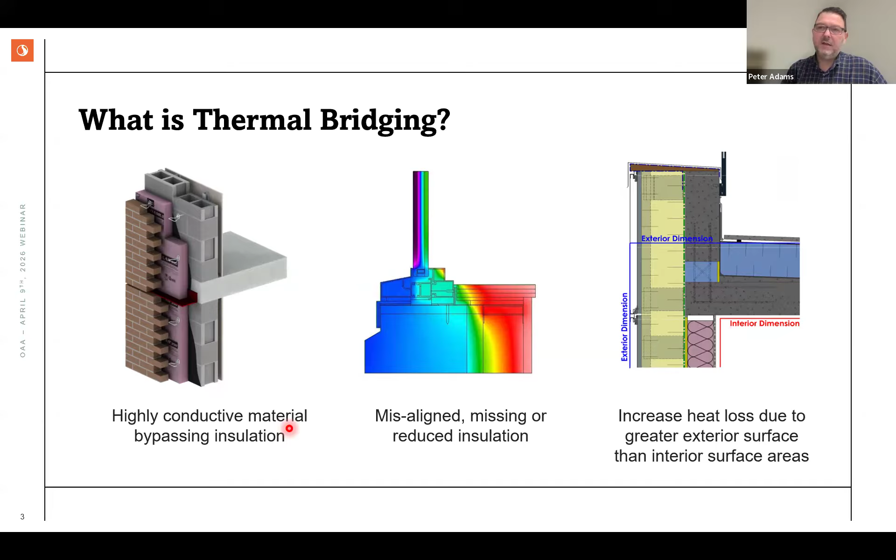And the one on the right is almost always ignored. It's the increased heat loss due to an exterior surface area being greater than an interior surface area. If you think about it, it makes sense—heat flow is an area function, an area phenomenon. So if you've got a larger surface area outside, you're going to conduct more heat through the wall. That's what a thermal bridge is.

Just a reminder, heat is lazy. Just like your lazy teenager—if you put the fridge in a straight line to them, or the treat cupboard, they're going to get there pretty quick and eat you out of house and home. If you put the fridge in the basement and make it harder to get to, maybe they'll take their time getting there for the next bag of chips. So heat will follow the path of least resistance.

When we're talking about U factors or effective R values for walls, it includes thermal bridges, just for our discussion today. So these bridges, as you can see, we've got studs and other elements—they degrade the thermal performance of the overall system. They can lead to condensation, thermal discomfort, and certainly increase energy loss, which has been a focus for the last number of years.

So where do we find these? Well, common ones are that slab edge detail I showed you, where you've got a shelf angle protruding through, or around windows. But basically it's any type of repetitive structural member—a stud, a joist, a lintel—that repeats itself across the building envelope. Or it could be a one-off situation too, such as a structural penetration, a column or a balcony. The common one would be a support for a canopy that comes out through an insulated wall assembly to support a roof over an entranceway or something like that.

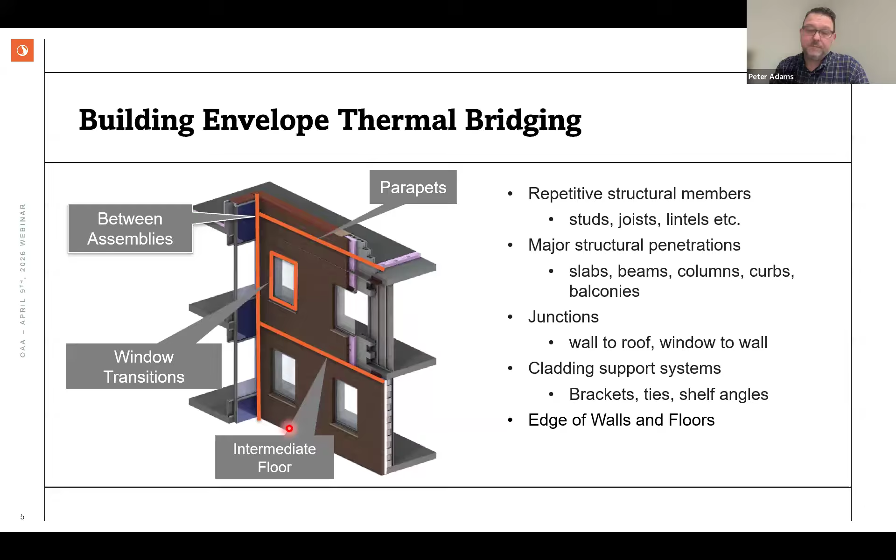So I stole this slide, this concept, from my friend John Straube. Some of you might know him, some of you are probably trained by him.

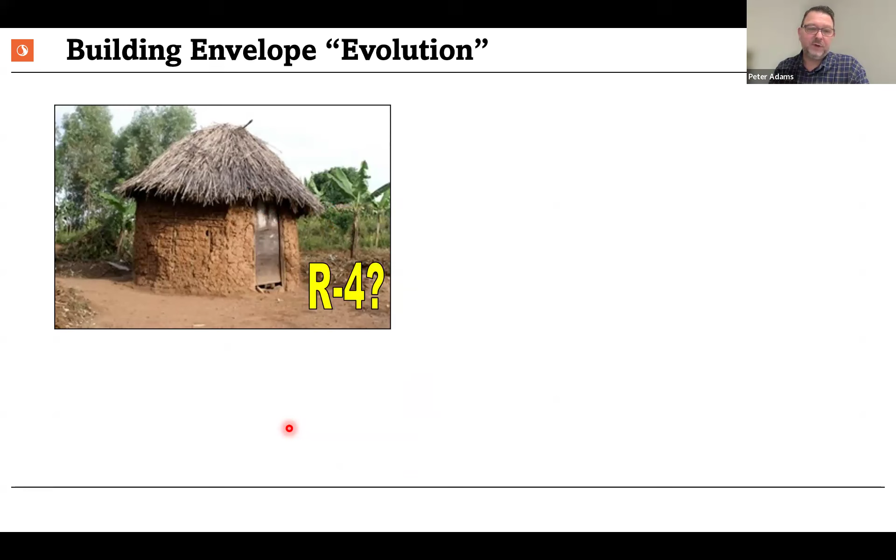The evolution of the building envelope's thermal performance—years and years ago we moved out of caves and started building for ourselves, starting off with something like this maybe, and with a mud wall maybe getting something like R4. We move forward—this is the Tower of London, built around the year 1000, and here with just the thickness of the walls we have, maybe it's about an R5.

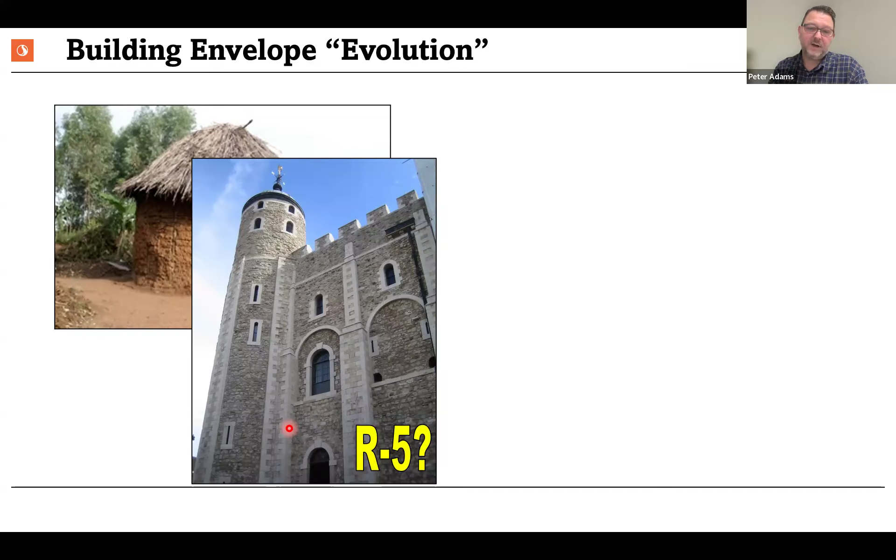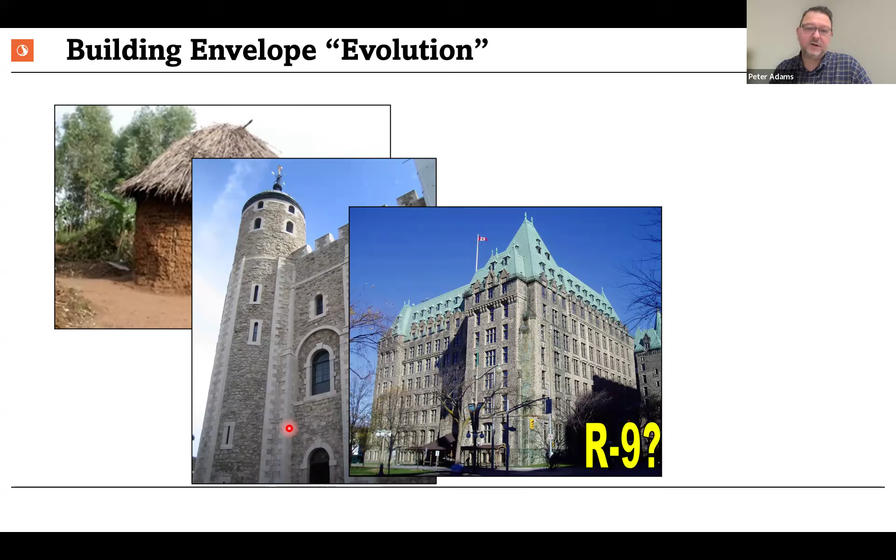This is the Justice Building at Parliament Hill. I had the pleasure of working on this building when I was at the National Research Council. It's a thick stone wall, but it's got terracotta brick on the inside, plaster—just with all the different layers and some air spaces, maybe you achieve an R9 for this building.

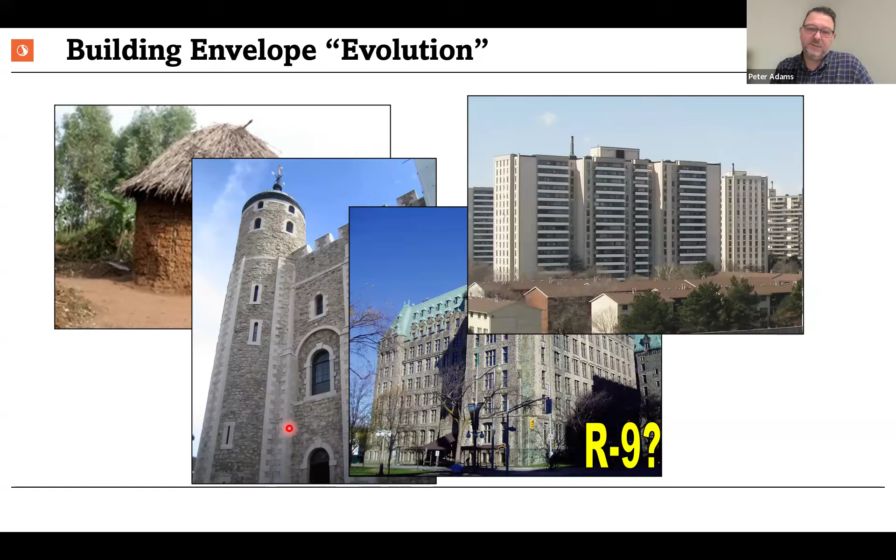This condo or apartment building—there are hundreds of these in the Toronto area, going up in the 60s and 70s. It started to introduce some insulation into these walls, and maybe we get to R11. What about a semi-modern window wall system or curtain wall system? What do we think the R value for that would be? So should we get poll number 1, please?

Okay, so if you thought it was R20, I can certainly understand your optimism.

Okay, looks like the majority of you are picking R4, which sadly is about right. I did have an argument. I remember discussing this building when it was being constructed, and having an argument with one of the designers at the time who was adamant that the walls were R20. At the middle of the spandrel panel over the slab edge, it might have been R20, but for the most part, that building was operating as an R4.

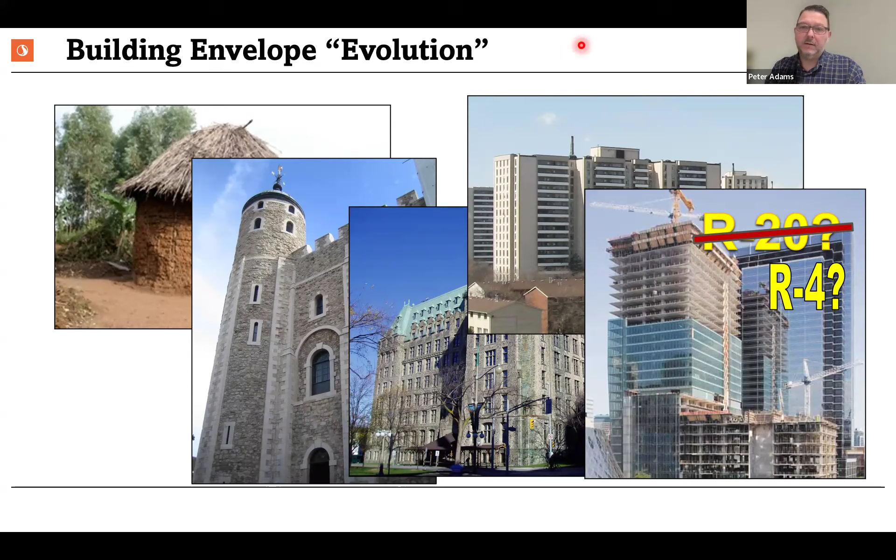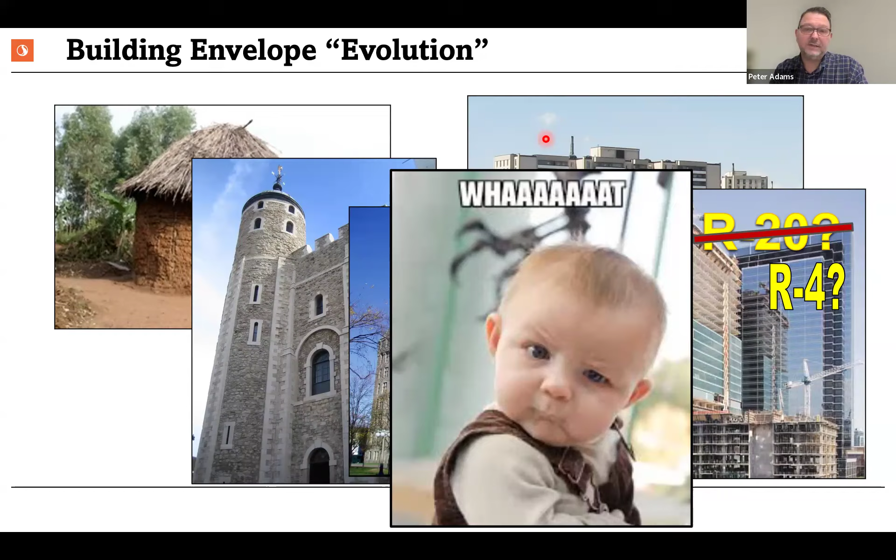A little bit surprising. Now this little guy looks like he might be doing something else at this time, but he's surprised. And either way, it's a pretty crappy situation for our wall systems when we've got modern buildings going up like this. But there is hope.

So we've got poll number 2, please. There'll be a test later. No, just kidding.

We're about split. So I see the poll results coming a little bit delayed. That's okay, we're about split on this. 24% said there's no way to tell. 44% said the areas without condensation are spandrels, and 33% said the areas without condensation are vision areas.

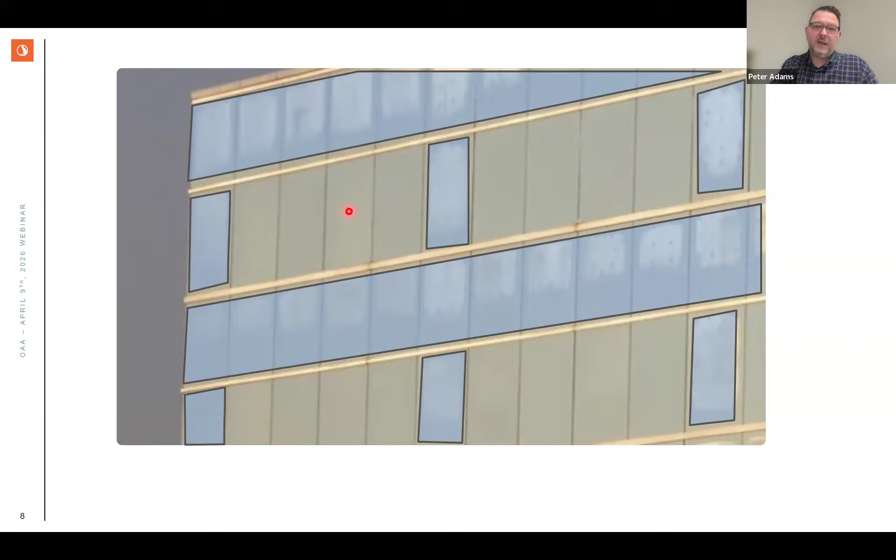What struck me most about this picture is that, apologies, that there's a lot of areas where there's still no condensation in the spandrel sections. And so that means there's heat transfer there. There's maybe not as much heat transfer as the glazing, but there is certainly more heat transfer here than you would expect from an insulated spandrel assembly.

You can even see the heat transfer as a result of the stick pins that are holding insulation into the back pan. There's little areas here. There's just enough heat coming through those pins to warm up the exterior glass in those areas to prevent condensation.

But what struck me is that, and what I mean by poor man's infrared here, is that if you're a building mechanical engineer and you're designing your system based on the thermal performance of this wall, and you're assuming this whole panel here is going to give you the thermal protection that's expected on paper, well, you're going to grossly underestimate the amount of heat loss that you're going to get for this building.

And that's why for many, many years—it's getting better now, but for many years—a lot of the predictive equations for thermal performance for a building were always more favorable; the results were always better than what the reality ended up showing as the building started to operate for a number of years.

So this was a big deal. If you're designing this, you're going to assume that all this is at, say, R15 or whatever, but really it's not. And if you take this over the whole area of the building, that adds up to quite a bit. And we're going to get into more of that as we move forward.

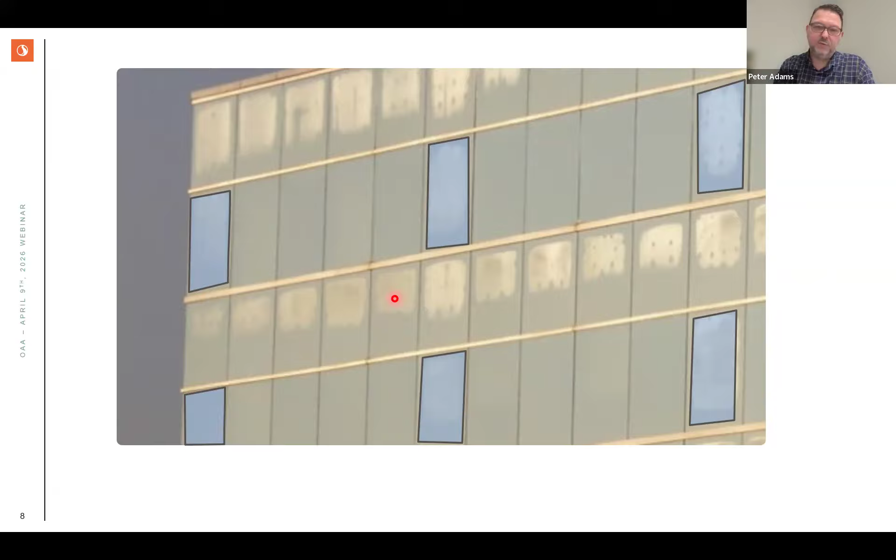So this is what's happening here. You've got quite a bit of heat coming through the glass. You've got a lot more heat coming through the framing, the metal parts, and then less heat coming through the insulation.

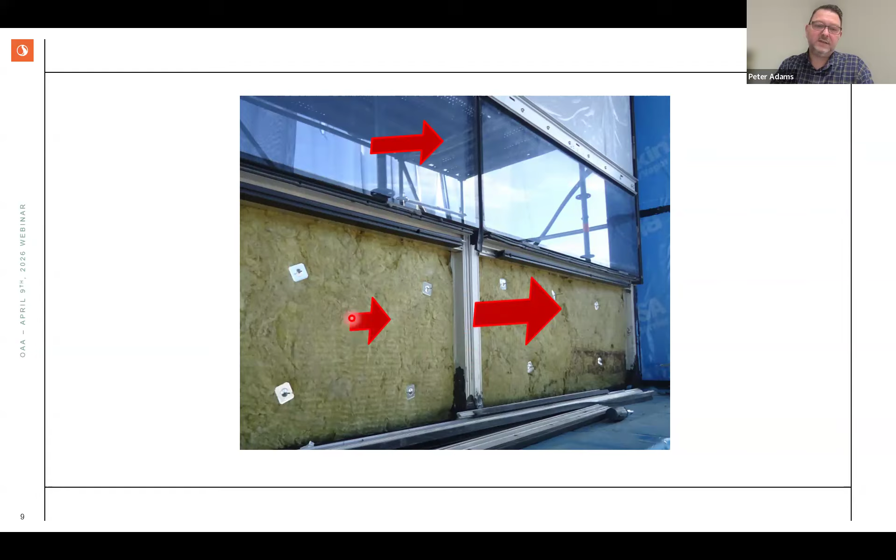So it's not just academic. We've got a lot of buildings that look like this in the Toronto area and in Ontario, and across Canada for that matter. And for a while it was kind of, well, yeah, you're going to lose more heat, and then your energy bill is going to be higher. But we're starting to see some real world implications of these decisions to use some of these systems that don't provide the best thermal performance.

This was a brand new condominium corporation we were doing a performance audit of. And one of the things we noticed when we went into the suite over here, you can see this is a brand new building, and there's already condensation occurring on the inside of the glass.

There's a little bit of snow and ice that accumulated outside, and now you've got condensation on the inside. But more telling to me is that this chair is now pushed away from the exterior wall.

In the old days, you had an opaque wall here, maybe with a punch window. You could put your furniture right up against the wall, sit and watch your Netflix or whatever. Now, if you're too close to the wall, you're too cold. You've got this cold surface that's sucking the heat from the back of your head as you sit and watch television or read or whatever you're doing.

So everybody's moving their furniture away from these walls, and your 800 square foot condo is now a 700 or 600 square foot condo, because this part of the wall, the floor here, is not really usable for furniture or for living. So it's not just academic anymore. There's real world implications of some of these decisions.

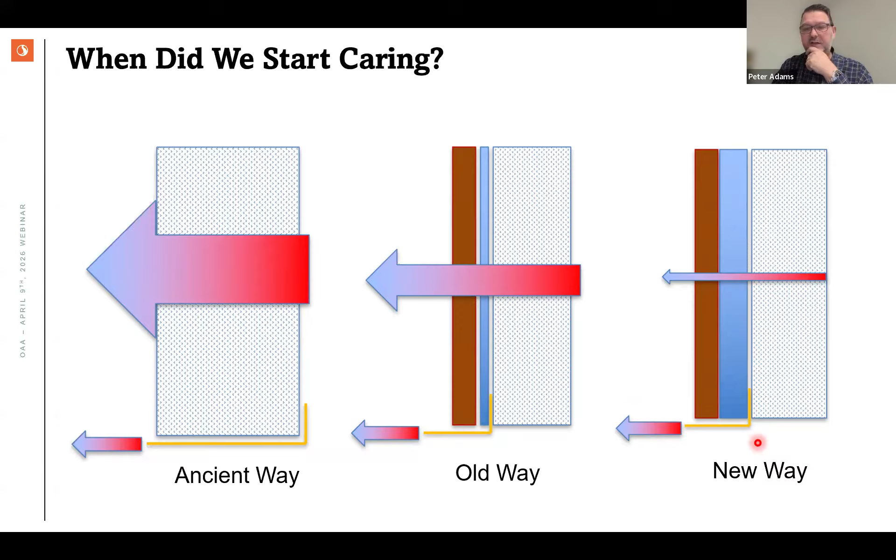You can see here that even though the thermal bridging hasn't changed, the amount of energy coming through our clear wall areas is greatly reduced. And so now this all of a sudden becomes a very large percentage of the whole energy loss for the building. We can no longer ignore these thermal bridges - they have to be included in our energy calculations and designs. Otherwise, we're just kidding ourselves.

So back about 15 years ago, maybe 16 years ago now, ASHRAE was starting to care about this stuff too, and the research project 1365 was put out. Morrison Hershfield at the time was a successful contractor for that work.

So these are slides captured from a presentation given around that time. At that time, the intent was to pick 40 common North American details and then do three-dimensional heat transfer analysis on those to try to figure out the effect of the thermal bridging. These assemblies included things like exterior insulated steel studs, concrete mass walls, curtain walls, precast panels, brick veneer walls - all assemblies that are quite common.

We didn't want to pick anything unusual, figuring that might come later should this catch wind and move forward. But that was kind of the focus back about 15, 16 years ago when this project first started.

One of the things we had to think about, and try to come up with a way to report this information once we started getting all this three-dimensional work done, is how to settle on a certain nomenclature. How do we report this? So we ended up with three different types of heat transfer.

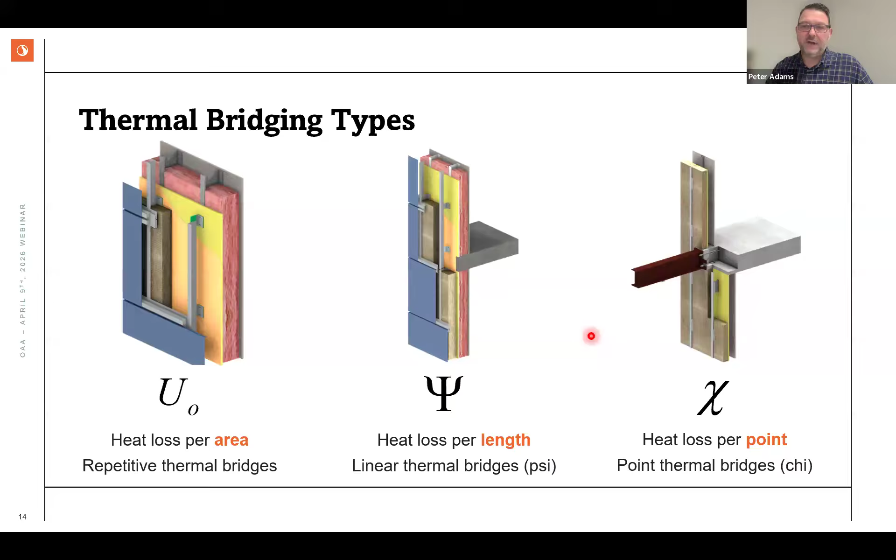And then we have our psi values, or our heat loss per length, our linear heat transfer, our linear thermal bridges. And then we have our point load heat transfer, or our point thermal bridges, our chi values. So the idea is that you add all these different types of heat losses together, and you can get a really good, accurate picture of the energy loss in your building and what's really going on.

The concept took a while to develop, and we actually picked up this concept from Europe—this whole idea of linear heat transfer and point load heat transfer.

The basic principle is pretty straightforward. You model the whole 3D assembly, such as this here, which would be your clear wall area plus, in this case, the through slab area, and you get a total heat loss. Then you model the wall without the thermal bridging element—just the clear wall area. If you take the difference between the two, you get the additional heat loss from the thermal bridge.

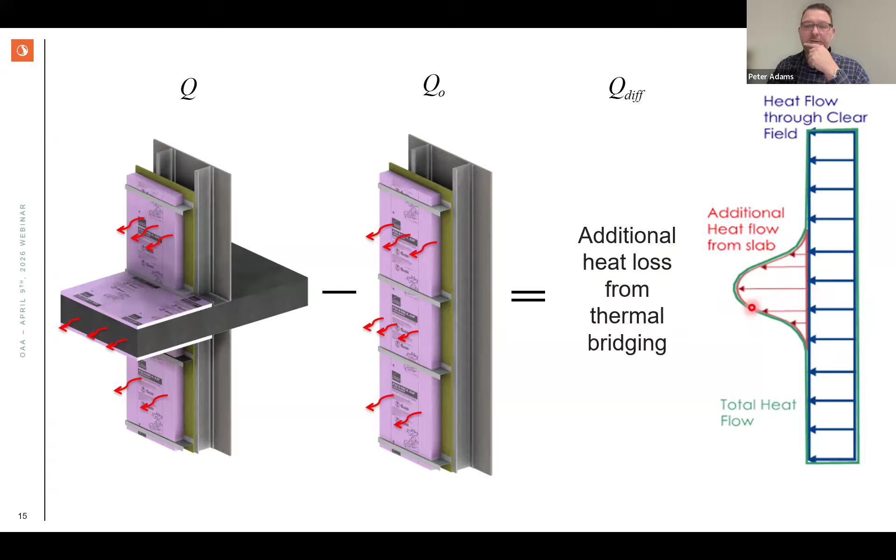So from a mathematical standpoint, your Q naught is basically your heat loss through the total wall of the building. You're assuming all the thermal bridging that occurs is included in that baseline wall assembly. Then you take the sum of all your linear heat transfer elements times their total length—if you've got 300 feet of something, you add that up. Then you take your total number of point load elements and add those up. This whole equation then becomes your total heat loss for the building.

So it's the clear wall U-value times the total wall area of your building, plus all your linear heat transfer elements added together, plus all your point load heat transfer elements added together. It ended up being fairly simple math, once the hard part—all the 3D work—had been done.

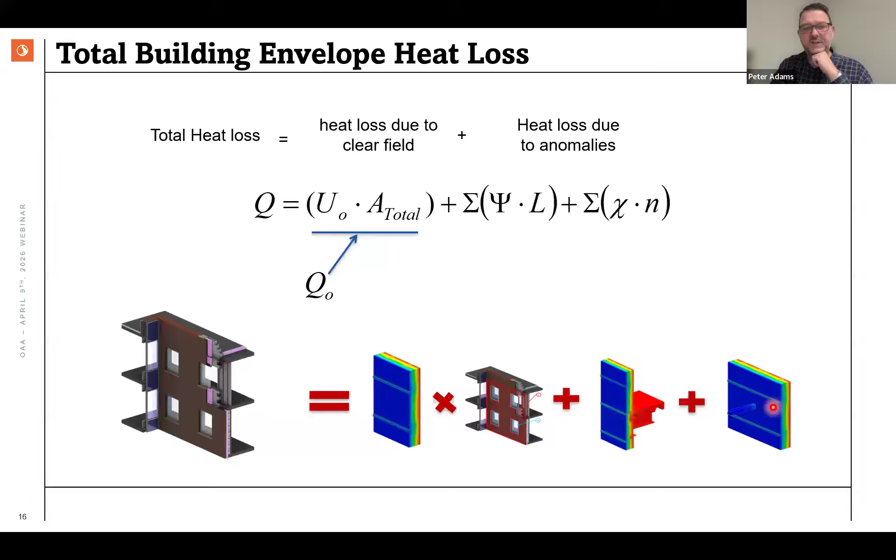The intent of this 1365 research project was to take the modeling away from the hands of the users—get the modeling done first, and then make it a lot easier for people to use the information that came out of it. Now, it was tricky.

With 40 details, it was unlikely you'd find a detail that matched what you had in mind for your building. You might get close and have to extrapolate between two different assemblies, but it was unlikely you'd find exactly what you wanted. Now we've got over 800 details produced, and the chances are pretty good you'll find something close to what you've got in mind for your building. So it's much more user-friendly and applicable now that you've got all these details at your fingertips.

The information that came out of that research study was put together into a thermal bridging guide. Some of you might be familiar with it—we'll get more into detail in a minute. Basically, the guide had an appendix with Appendix A and B. Appendix A showed what the wall looked like, with all the assumptions about the materials and how the wall was put together. Appendix B was the thermal performance information that came out of it. We'll step through that in more detail in a little bit.

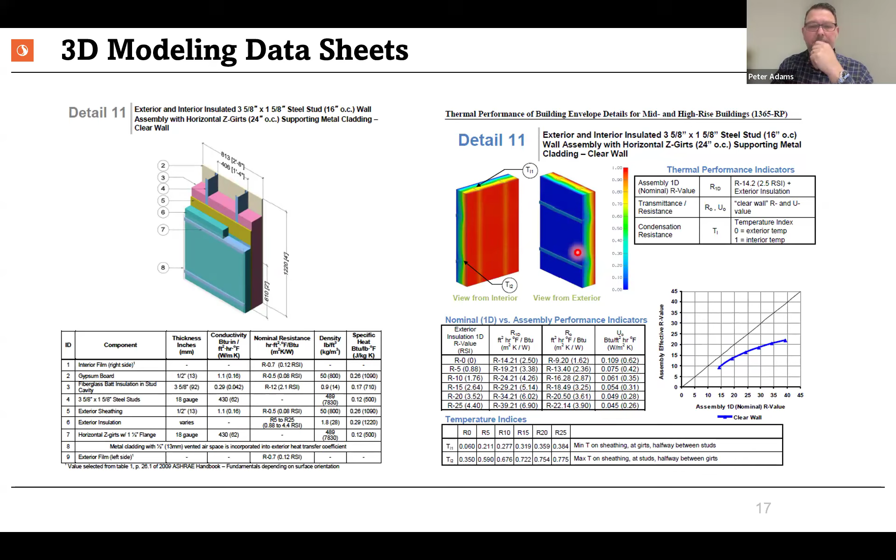So we started publishing information from this, and we weren't very popular for a while—sometimes reality is a difficult thing to swallow. A lot of the window wall and curtain wall manufacturers weren't that pleased that all of a sudden we're showing their systems performing a lot less than what everybody originally thought. People probably knew they weren't as good as some of the numbers being put forward in the literature, but I think the level of loss of performance was more significant than anybody would even imagine.

This is a very telling graph here. The blue line is a detail with air in a stud cavity—just an exterior wall. The red line is the same wall with foam in the stud cavity. On the left-hand side is your R value for the spandrel section, and on the bottom axis is the backpan insulation, the book value of insulation you're putting in the spandrel. You can see if you put R5 in the backpan, for the wall with spray foam you get an R value of 8.2, while without the spray foam you get an R value of 4.2.

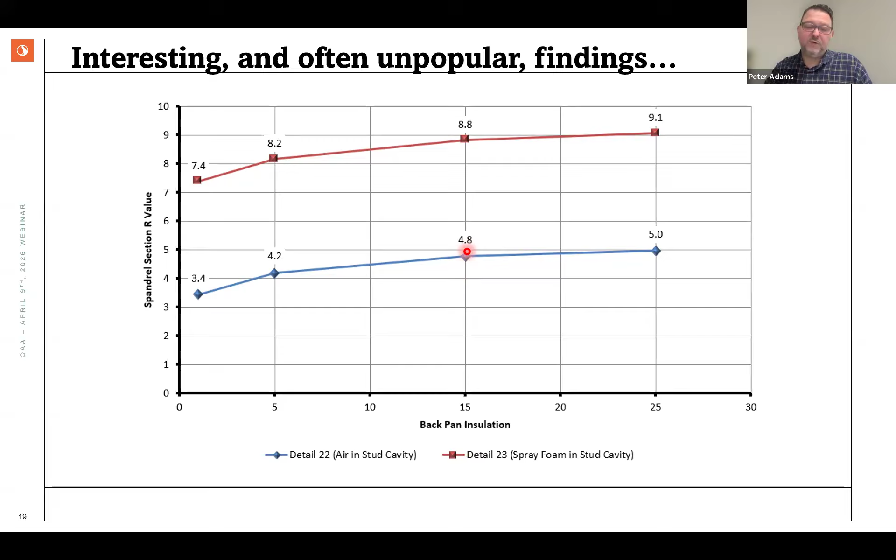And so you lose a lot of your thermal performance from that connection. You can see, the building on the top left was a building that I saw from the Chicago boat tour, the architectural tour from the Chicago River, which I highly recommend. It was fantastic. But you can see these types of details everywhere in our construction.

This one here is the Absolute Towers in Mississauga when they were under construction. It's a little bit of a cheap shot - I mean, this is an air-cooled engine. And the thought, of course, here is: should we actually design our buildings to look like things that are designed to exchange heat with the outside air?

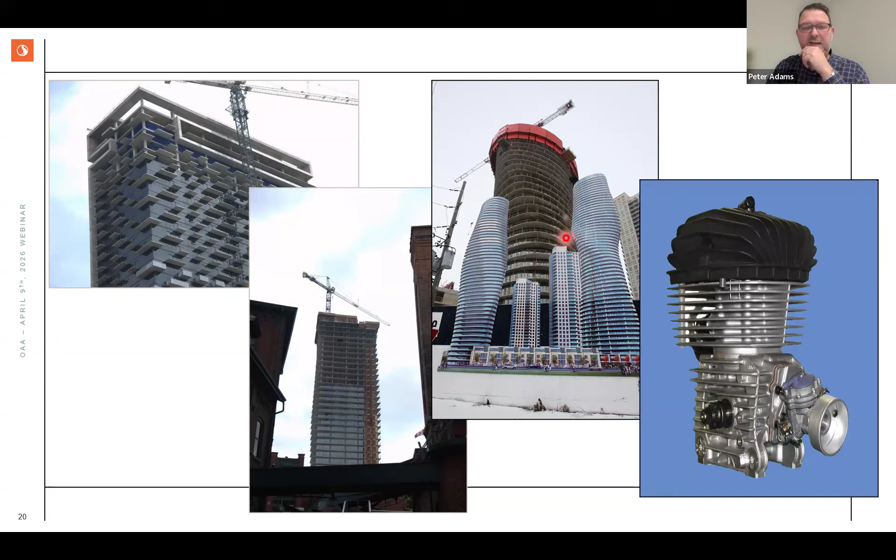Now, concrete's not nearly as thermally conductive as aluminum or steel, but I think you get my point - why would we design buildings that look like they're trying to lose or gain heat in the summertime? Food for thought. There's been some debate out there for a while too.

Is a balcony worse than an eyebrow? Is it worse than an exposed slab edge? When you look at the numbers, really all these three types of assemblies are basically all the same, and they're all poor, right? The balcony is really not much worse than the eyebrow or the just exposed slab edge. Either way, they should be avoided, right?

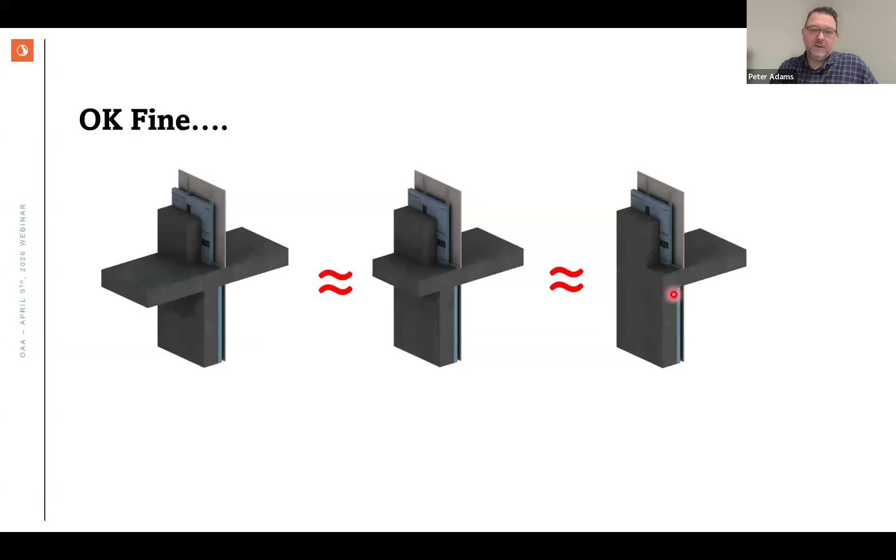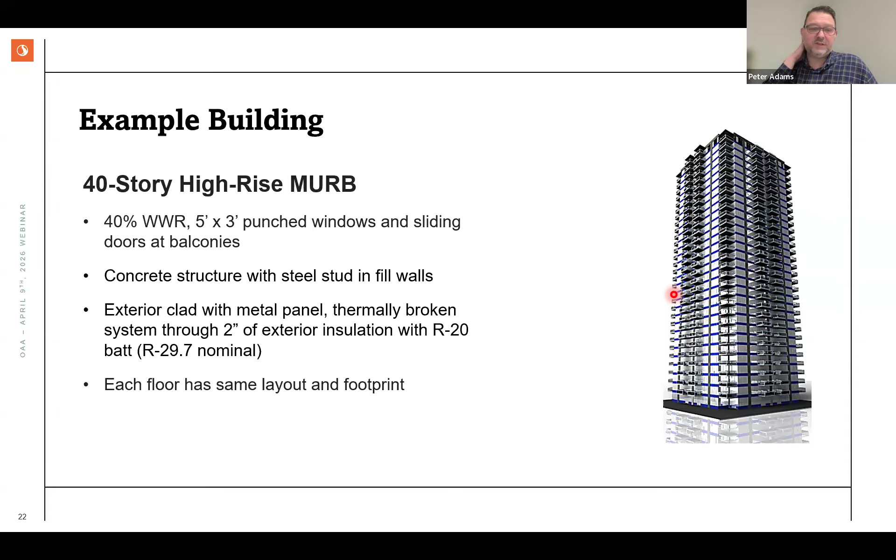So as an example, we have a 40-story high-rise building here, a multi-unit residential building. It's a 40% window wall ratio with 5x3 punch windows, sliding doors at the balconies. It's a concrete structure, which is pretty common, with steel stud infill walls, clad with a metal thermally broken system, 2 inches of exterior insulation with R20 batt. So the wall has actually got a nominal R value of almost 30, 29.7. And each floor has the same layout and footprint.

So if you look at this building, the hard and cold truth of this - we have the R value on the axis on the left. For the nominal wall, if you assume there's no thermal bridging at all and you're taking full advantage of the insulation, you're in the fantasy world where your R value is about 30, 29.7. Then if you talk about the clear wall area, including some of the thermal bridges of the clips and attachments, and include that in your model, you've got an R value of 17.7 - still not bad, a lot worse than 30, but still not too bad.

But then when you take the clear wall and start considering the slab edges and the balconies and the heat loss you get at those assemblies, you're down to about 11.6. And if you actually go to full reality, where you're looking at the clear wall, the slab, balconies, and window transitions, you're actually down to about R5.3. So maybe what you were considering your R17.7 or R18 building is really performing at R5.3 when you start looking at all the thermal bridging through all the details of the transitions, window surrounds, slab edges, and everything else.

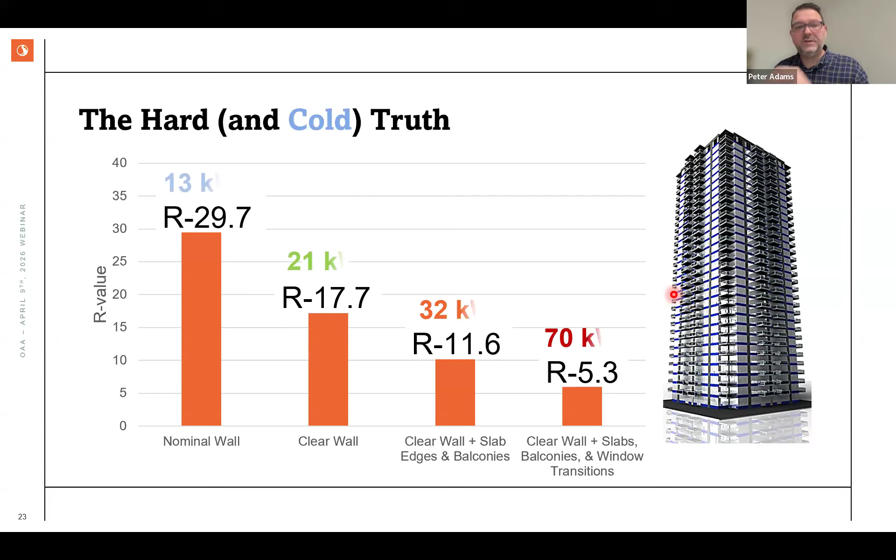And what does that mean? If you look at energy loss or energy use per day, maybe you weren't considering the 13 because that's a bit unrealistic, but maybe you thought it was going to be 21. You're actually at 70 kilowatt hours a day. So that's why, as I mentioned earlier, a lot of the building simulations were underestimating the amount of energy loss that was going to occur when the building was actually functioning, because all the thermal bridges were being ignored.

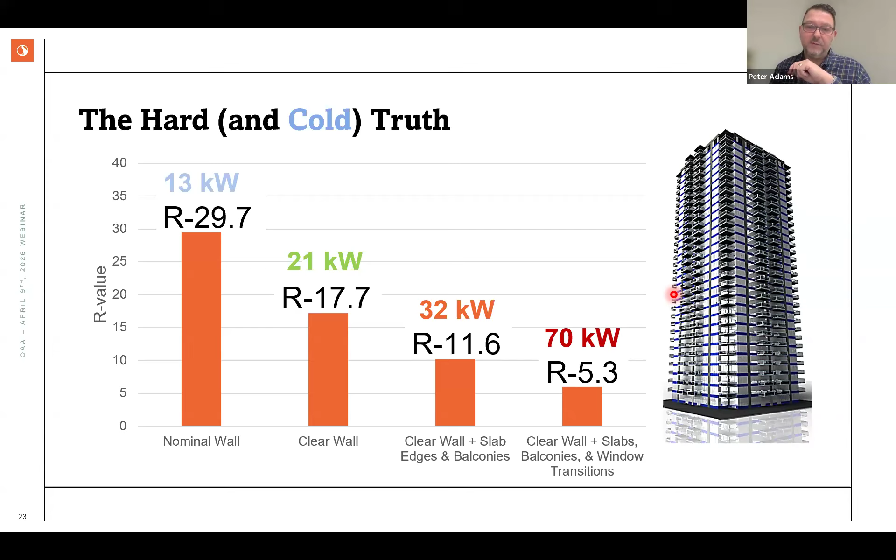So how do we fix this? What do we do to mitigate these things? Well, the type of strategy depends on the thermal bridge that you're dealing with.

A big one, it's codified now, is continuous insulation. That gets us a long way into reducing thermal bridges through our envelopes.

Aligning insulation is huge. I worked on a building in Labrador, a hospital, and they had triple glazed units, and they basically mounted them outdoors. There's a 3-inch disconnect between the wall insulation and the insulating plane of the glazing unit. So they took all these very expensive windows and mounted them outdoors, basically. There's no way they could perform properly, right?

So align your insulation planes, and that includes your thermal breaks and all your windows and doors and all your flashing elements. You want to minimize those conductive elements. If you've got a through-wall flashing, is there a way to use a thermally broken flashing, or a membrane flashing that doesn't have a high thermal transmission? So look at how you're flashing and detailing your buildings to try and minimize how many times things go past the insulation. And if things have to go past the insulation, then make them non-thermally conductive.

Use intermittent structural supports. I remember I talked about how heat is lazy. If you make it harder for the heat to leave, then you'll have less heat leaving. So look at ways you can take away your continuously mounted support structure. Is there ways to reduce the number of connection points back to the uninsulated portion of the building, or the part of the building that's behind the insulation?

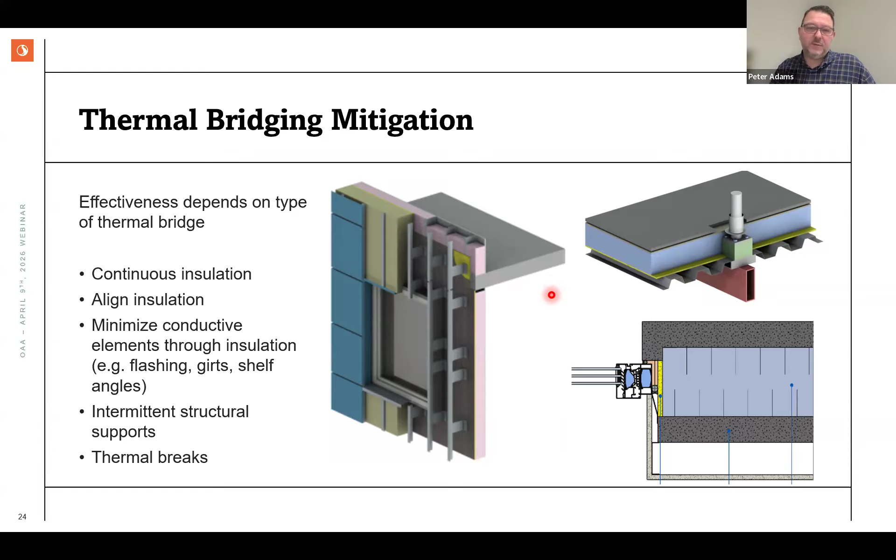And then, of course, utilize thermal breaks. You want to use thermal breaks wherever you can in your cladding attachments. We've been using thermal breaks in Canada in our window systems for a long time, but look for opportunities to use thermal breaks either in the products that you're using or in some of the systems that you're picking. We can talk more about that in a minute.

So this was a research project we worked with Tridel quite a long time ago. They were interested in thermal break technology at their balcony slabs. People still wanted balconies, so they were trying to figure out a way to reduce the number of complaints due to condensation and cold, but at the same time they understood that it made sense to make their buildings more efficient as well.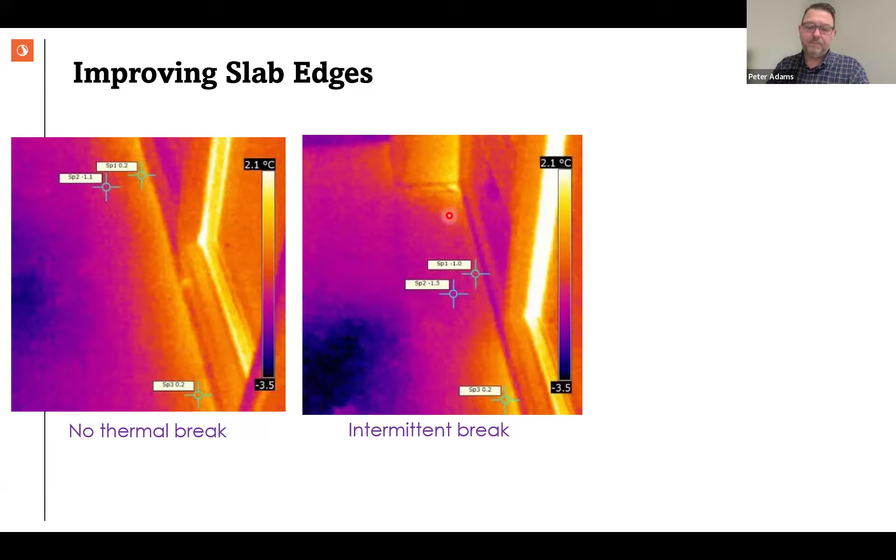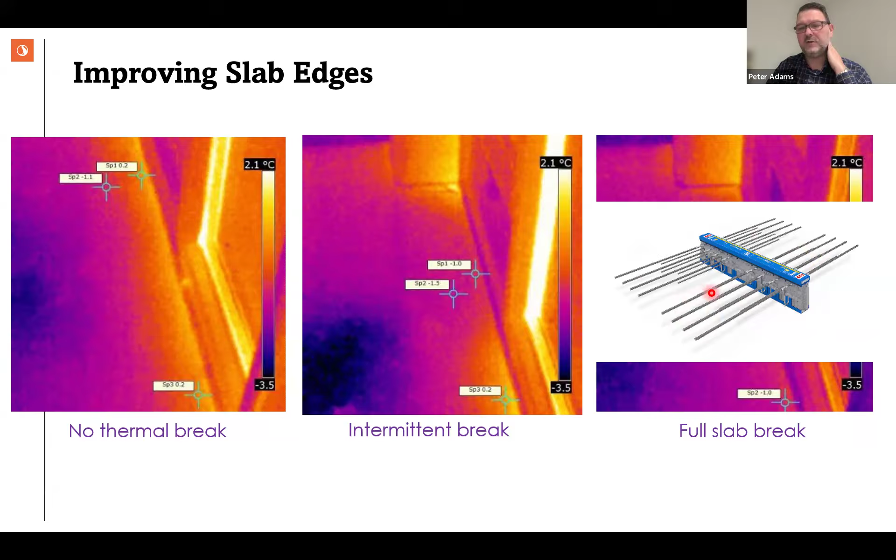And then the last one here, they used an off-the-shelf product called Isokorb, from a company called Schöck in Germany. It's basically a thermally insulated slab edge protection. So you insert this between the interior slab and the exterior slab. The stainless steel tiebacks or connectors, rebar, conduct a lot less heat energy than your traditional iron bar. This is basically a foam core. And you can see here, there's actually a substantial reduction in the amount of heat that was coming through underneath the window wall system. So it certainly makes a difference.

If you start using some of these technologies, you can make a large difference. You can imagine right away that a person standing barefoot on the right side of this wall looking out the window, in this situation, their toes are going to be pretty cold, much warmer in this condition over here.

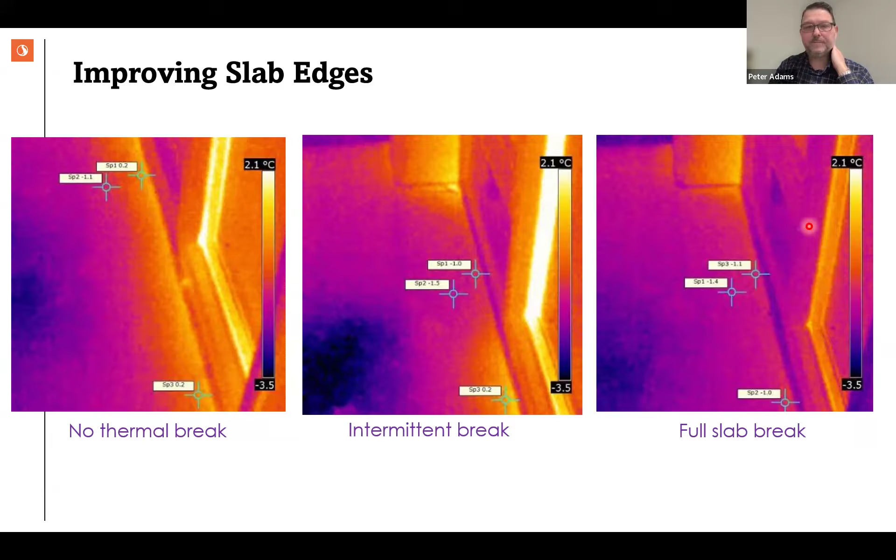So an uninsulated balcony has a very high linear heat transfer value, greater than 1. You start using the Isokorb or other thermally broken technologies, you can get down between 0.39 and 0.74. I haven't seen this in practice yet, but certainly on paper, it brings your thermal performance way up. You have a balcony that's supported by an exterior structure that's just attached back to the building where it has to be, so it's intermittently attached rather than having a continuous path for heat transfer. Again, heat's lazy—you make it work to get out, and you're going to have a more thermally efficient envelope system.

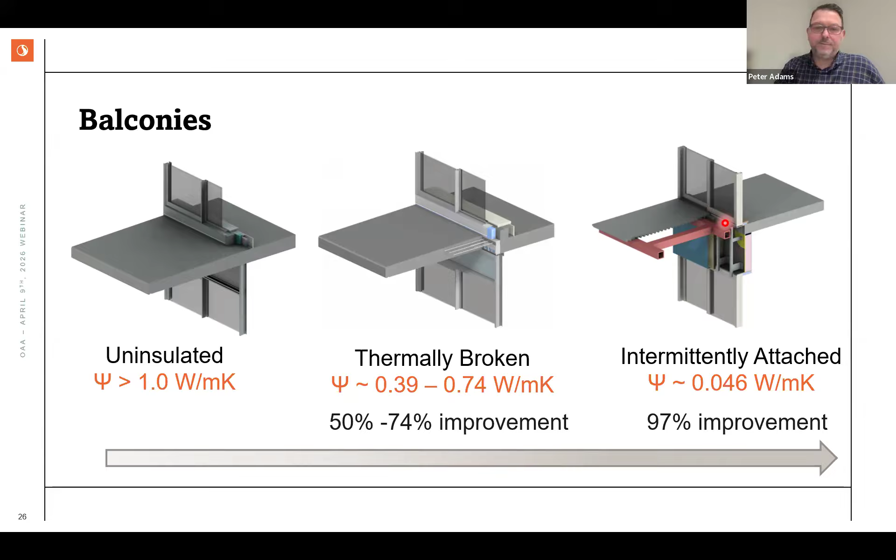So you want to try to avoid this. You want to avoid the situation where you've got exterior cold connected very well to the interior space. You want continuous insulation at the slab edge, whether it's a precast panel or some other exterior insulation system covering that slab edge, to greatly improve your thermal performance. So you want to try to avoid this situation over here.

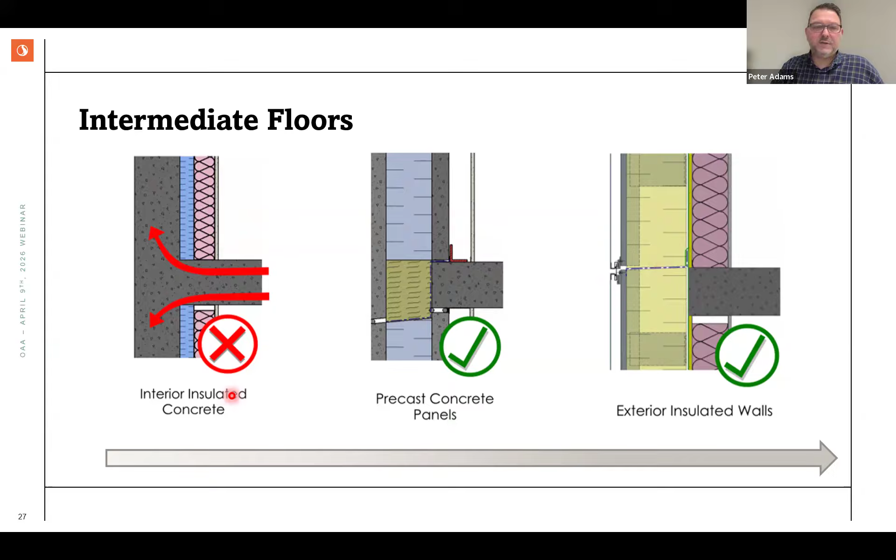Going back to the continuity, or keeping insulation in plane in a wall, and the difference it can make. On the left here, this was the situation I was dealing with in that hospital in Labrador, where you had the wall insulation, but you had the window sitting outboard of the wall insulation. So there's a huge discontinuity between the wall and the insulating value of the window.

If you do a better job of lining those up, you can see the isotherms here, you get about a 30% improvement just by moving that window assembly slightly in so that it's connected to the wall insulation. And if you bring it fully in line with the wall insulation so that you've got these vertical isotherms, then you can improve by about 62%. So it can make a really big difference.

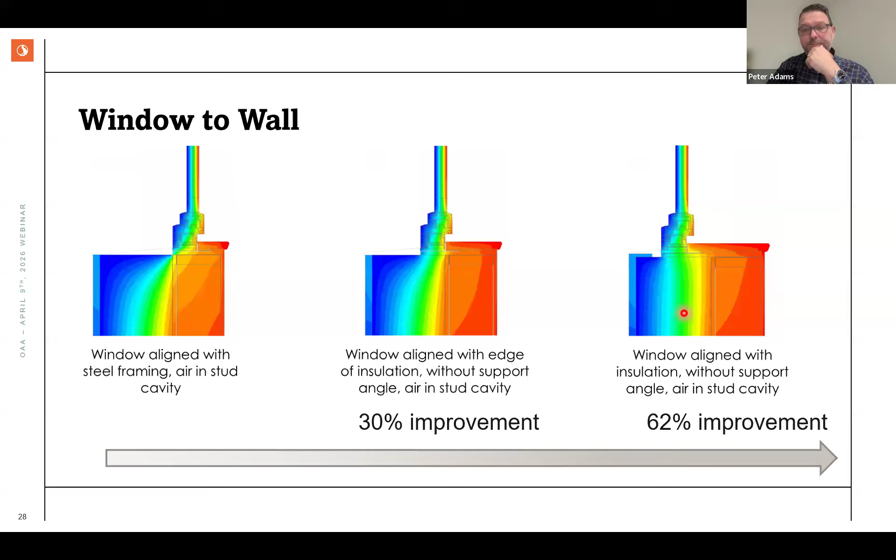So this was a condo that we worked on a number of years ago, and we've got our next poll.

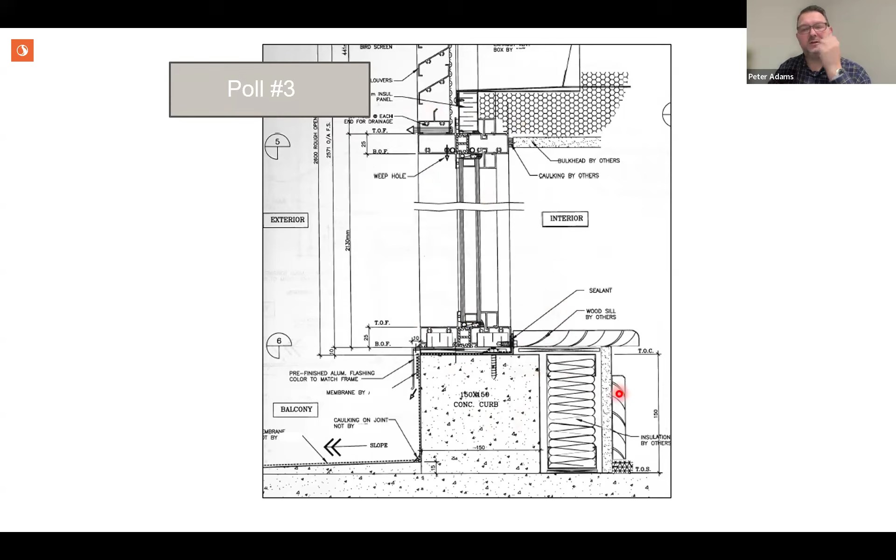Okay, so what do we think here? Do we have condensation at the head of the window? Do we have condensation at the stool? Or do you have condensation everywhere? What were the owners of this condominium complaining about?

Well, I don't see the results yet, but the owners complain about condensation. Okay, now I have the results. 12% said condensation at the window head. 58% said condensation at the window stool. That's very good. Condensation everywhere, 30%. So most of you got this one correct.

There's an obvious thermal bridge here, right? You've got your wall insulation here. You've got a stool, a wooden stool sitting on top of this curb. This window is sitting outside, just like I was talking about with our Labrador condition, right? All your wall insulation's here. This is exposed completely outside with no thermal value. So this curb is going to be almost outdoor temperature. And so you're sitting your window on top of this curb. This whole assembly down here is going to be very cold, right? The same condition doesn't exist at the top, but down here, not a good scenario.

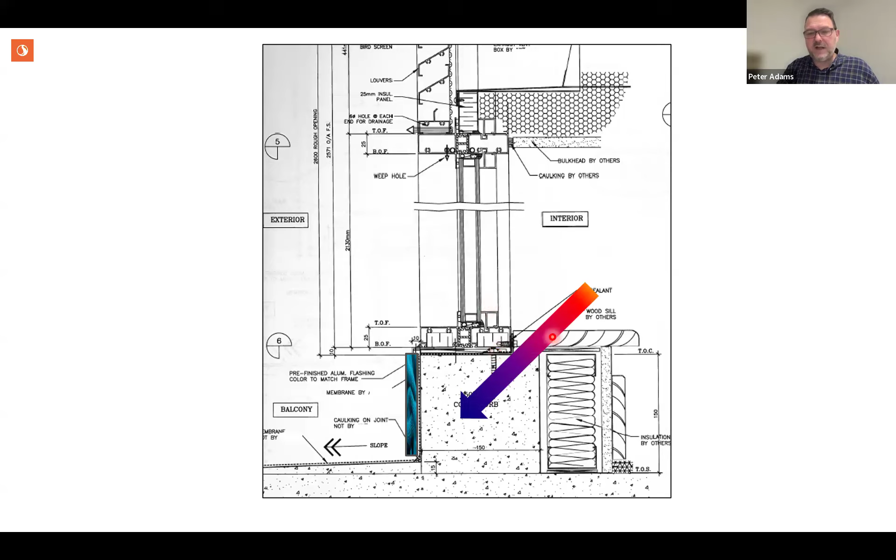So lots of heat transfer flowing through there. In this case, we didn't have a lot of real estate to work with here. So we ended up using aerogel, which has a high thermal value per inch, and put that on the outside of the curb, tied it as best we could into the window frame, and that actually increased the performance enough to reduce the condensation significantly in that assembly.

So it's much better to do it during the original design than it is to come back and try and do a retrofit. In this case, the retrofit was actually reasonable, but there's certainly additional cost, and it cost more after the fact than it would have been if it was part of the original design.

Right. So once that insulation is added, the amount of heat loss through this assembly here greatly reduced.

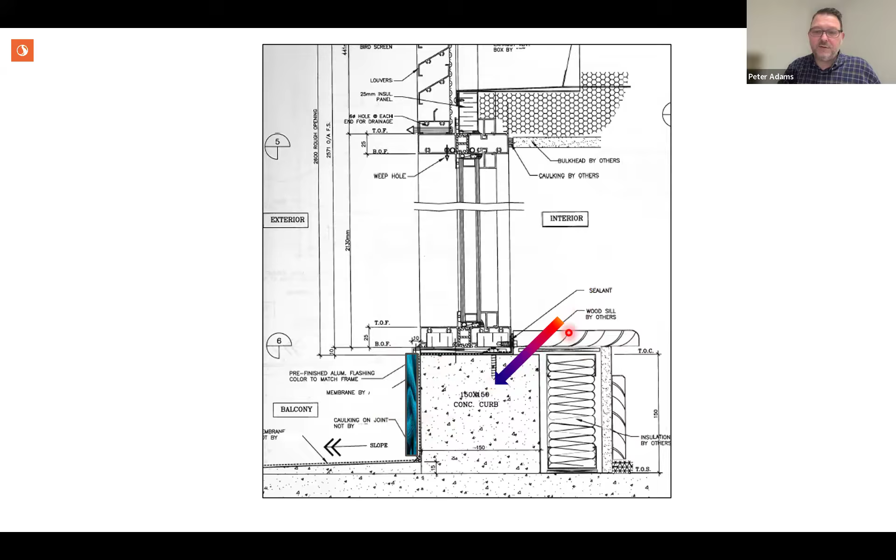So once you start thinking and learning a lot about how these systems operate in real time and real performance, you can start making improvements on different products that are available. And we've done a lot of work with manufacturers to try and help them improve their systems, their assemblies, or even just individual particular products.

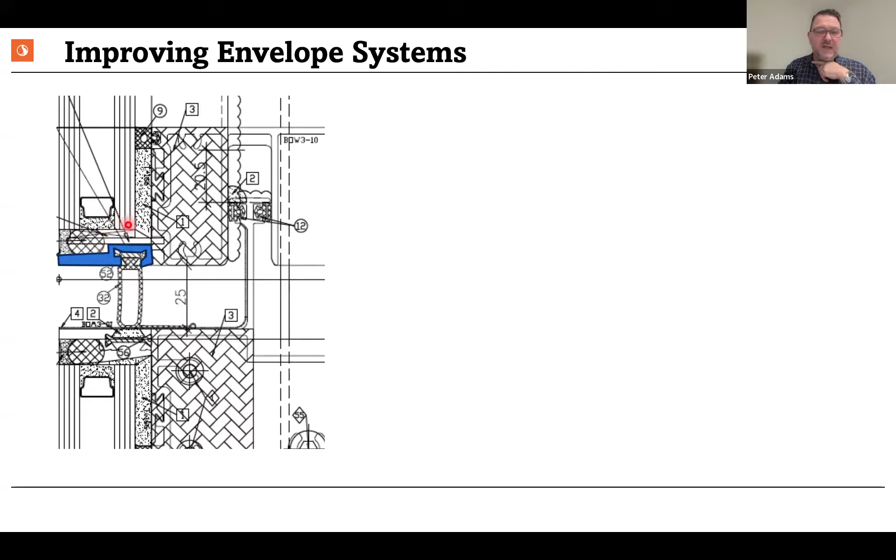But the results just from making that change from a metal clip to a plastic clip are pretty dramatic. This was a 2D thermal analysis done. On the left here is with the metal clip, and the coldest interior surface temperature for that part of the simulation was 1.6 degrees Celsius.

When the manufacturer started switching to a plastic clip, we did model the results. That 1.6 degree temperature went up to 9.1 degrees. So that's a significant difference in temperature just by making that one small change.

And if you're a mechanical designer, with this type of assembly, condensation in condominiums in particular is always on the forefront of people's minds and trying to reduce it. In this situation here at 22 degrees C, you can only maintain about an RH of 25% before condensation can be expected, which is not very high. That's a challenge for comfort and a challenge for designers.

But if you just switch to that plastic clip, you're reducing this interior surface temperature substantially, and now you can actually raise the RH up to 45% without condensation being expected. So it gives a tremendous amount of flexibility, an increase in flexibility for the mechanical designers, to go just from that one small design change. That's the kind of information that becomes available when you start looking at the systems and how they actually operate in real world conditions.

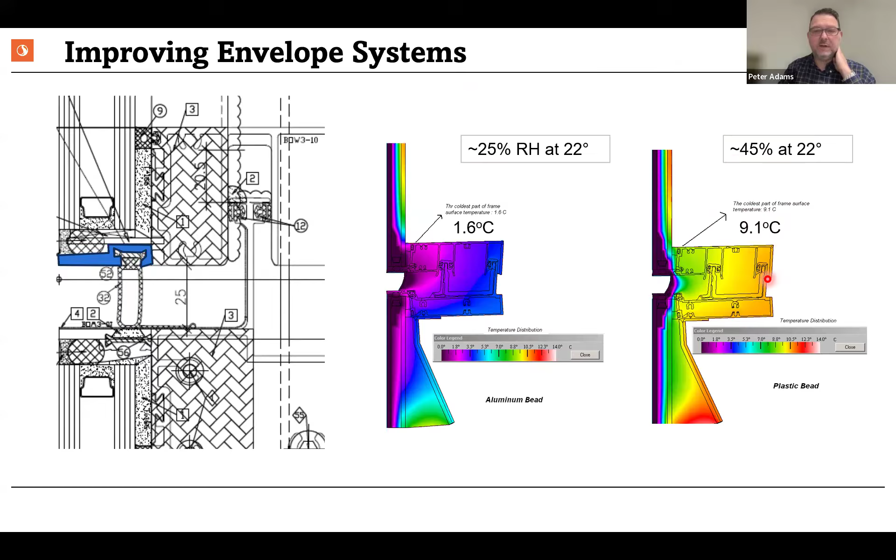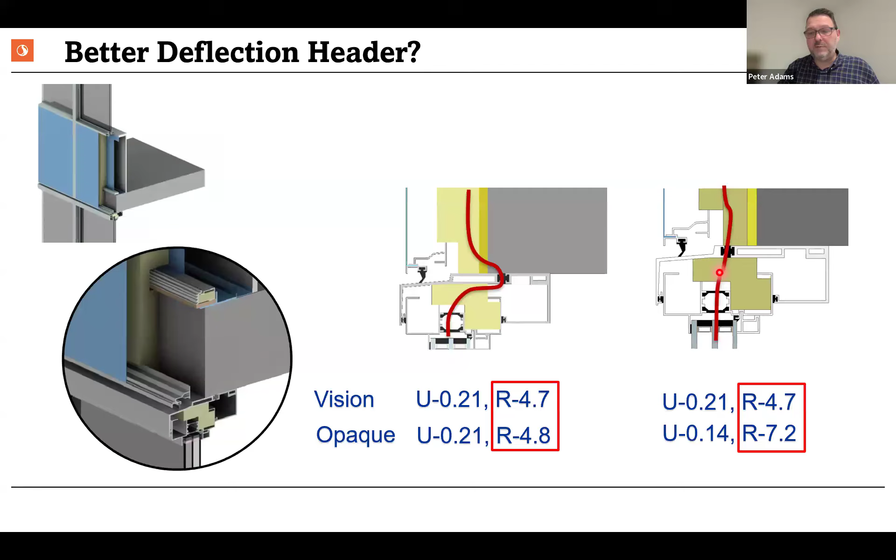There's ways you can improve all kinds of different assemblies. If you look at this deflection header here, down at the bottom, you've got your spandrel section and your glazing section below. In both cases here the vision area doesn't change because we haven't modified that, but the opaque areas have. If you look at just moving the thermal break from this location to outboard of the wall, to make it in line with the rest of the insulating parts of the assembly, you go from an R4.8 to R7.2. So again, making a fairly small change in your design can actually make an overall large improvement in the thermal performance.

Working with a metal panel manufacturer, as we started doing the simulation work, we found that 40% of the heat flow through the whole assembly was due to the window transitions. Without a lot of difficulty, we were able to advise them and tell them, maybe if you made this change and this change, there are some real improvements to be had in that system. So without making a lot of change to the manufacturing process, they were able to come up with a much better product detail and overall better performance.

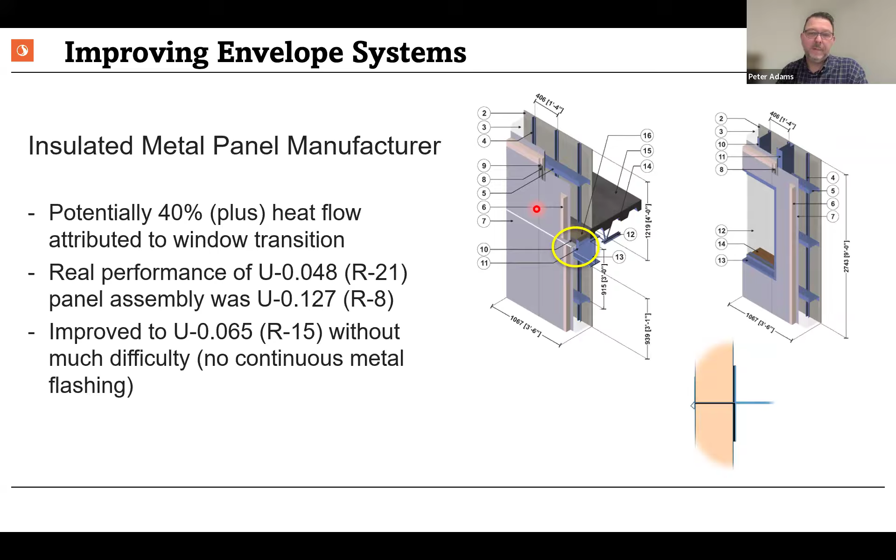And I mentioned these before, there's lots of ways to stand off your structural support now for your cladding from the wall system, to reduce the amount of heat transfer that's happening. Lots of these clip systems end up incorporating some kind of insulating piece against the wall. So the idea, of course, is to reduce that amount of heat transfer into those metal assemblies.

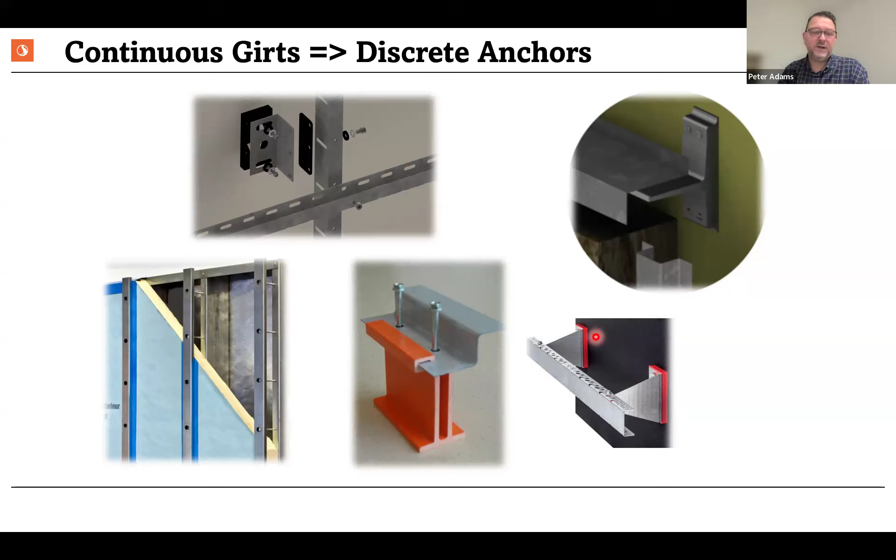So what are the benefits? I think we've probably touched on a lot of these already. There's certainly improved thermal performance, that's a big one, and reduced condensation risk. It's interesting, now we're starting to see condensation performance criteria in RFPs. I've looked at a number of projects where one of the line items is that you can't have condensation under certain operating conditions. So in order to respond to that and meet that requirement, you really got to understand how that building assembly is going to operate.

It gives you more design flexibility too. If you start looking at ways to reduce your thermal bridging, you start being able to have greater vision area. A lot of the buildings we've seen have huge glazing areas. A lot of it was built and constructed at a time where we didn't really understand how bad it might be in terms of thermal performance. Now you can use real values and real data for performance and actually confidently spec greater vision area.

You can start reducing your wall insulation too. If you've got better performance overall, maybe you can reduce that wall thickness and open up more usable space at the interior. And the less materials you use, the lower carbon footprint you have. So there's lots of trickle-down benefits of really understanding and designing and picking better thermal performing assemblies.

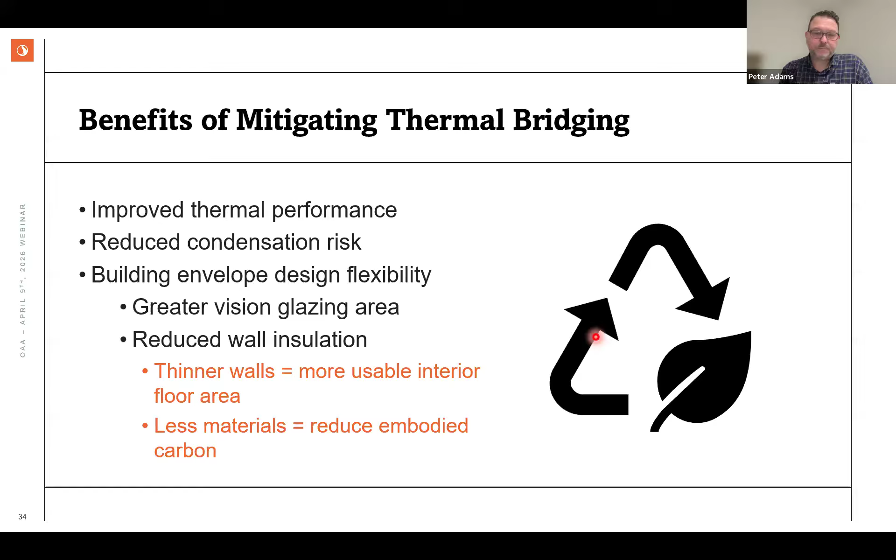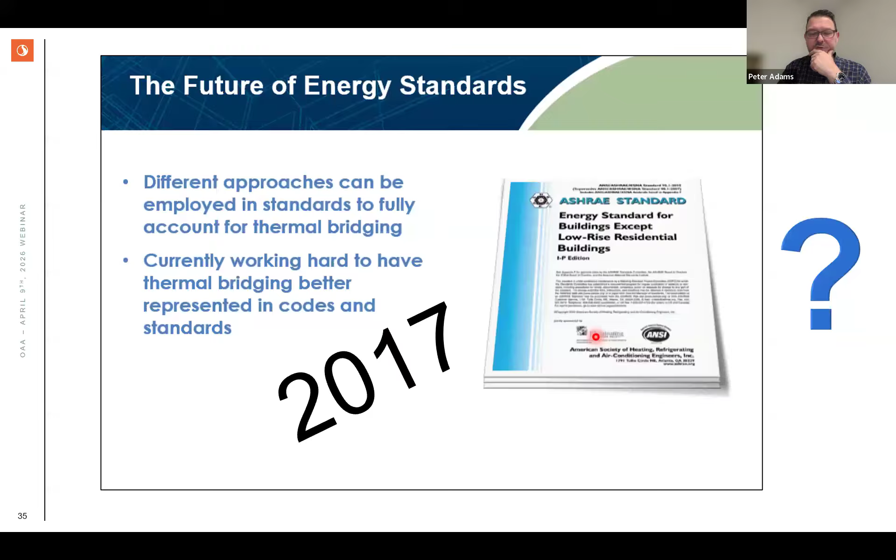Back in 2017, the future of energy standards, this was a slide I put forward. We talked about different approaches to account for thermal bridging. I said we were currently working hard to have thermal bridging better represented in codes and standards. That's back in 2017, and I'm happy to say that's come true. A lot of codes and standards now have certain elements of thermal bridging adapted into them. I won't go into details, but the National Energy Code for Buildings 2020 version has substantially increased the thermal bridging requirements, as has ASHRAE 90.1 2022.

IECC isn't used in Canada very regularly, it's mostly used in the United States and other jurisdictions, but the 2024 version also has increased thermal bridging elements.

Now, these standards are not referenced in the Ontario Building Code yet, but I say yet because eventually they will be. The current code has requirements for 90.1, and you can use either 90.1 or any NECB. The versions quoted do still have some thermal bridging requirements, but not nearly to the level as these new standards do.

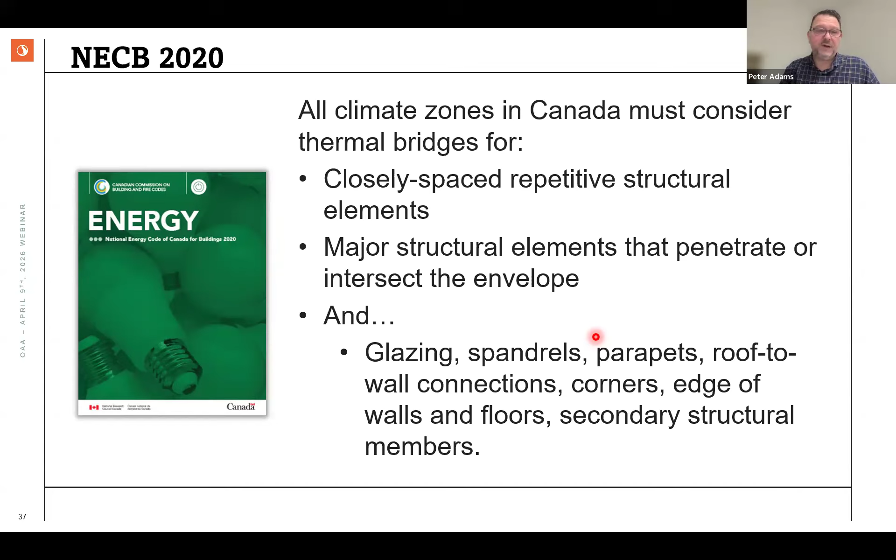The 2020 version of NECB basically says all climate zones in Canada must consider thermal bridges for thermally closely spaced repetitive structural elements, major structural elements that intersect the envelope, and all glazing, spandrel, parapets, transitions, corners, edge of walls - secondary structural members have to be considered in the 2020 version. The 2022 version of 90.1 is applicable for climate zones over 4, so certainly all parts of Ontario.

If you have a material with a K value of less than 0.433, it can be ignored. The overall overarching philosophy behind the new version of the standard is you need to consider wall to roof connections, intermediate floors, balconies, exterior cladding supports, window wall connections. That's really what it comes down to.

The current version referenced in the OBC has some allowances for thermal bridging, particularly through metal wall systems, but it doesn't nearly go far enough. This actually brings it a lot closer.

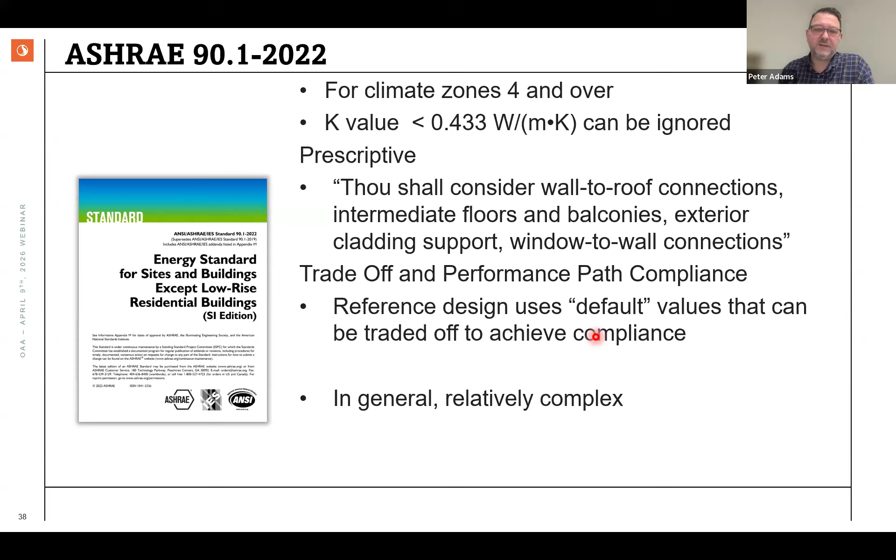You can do a trade-off or performance path as well, which uses default values, and you can trade off to achieve compliance that way. It's a pretty complex system in general, but it does work, and we're quite pleased that we're finally seeing thermal bridging effects encapsulated in our codes.

The IECC, as I said, isn't used in Canada, but it's similar to 90.1, a little less complex, and they add some other structures to that.

So you're going to say, where do I get all this information, Peter? Where can I find what I need to help with my building design? Well, the ISO 14683 International Standards Organization has a catalog of values. They're pretty conservative, but that's an easy quick check you can use.

Manufacturers for most of these systems now have their performance values put forward, and largely thanks to the work done through that ASHRAE research project, the values are a lot more accurate than they used to be, because people expect them to include elements of thermal bridging where it wasn't included before.

And then the thermal bridging guide - I'm hoping some of you have already used this or are aware of it. It's a kind of the result of that 1365 report that BC Hydro adopted and produced this thermal bridging guide. I'll get into that in more detail.

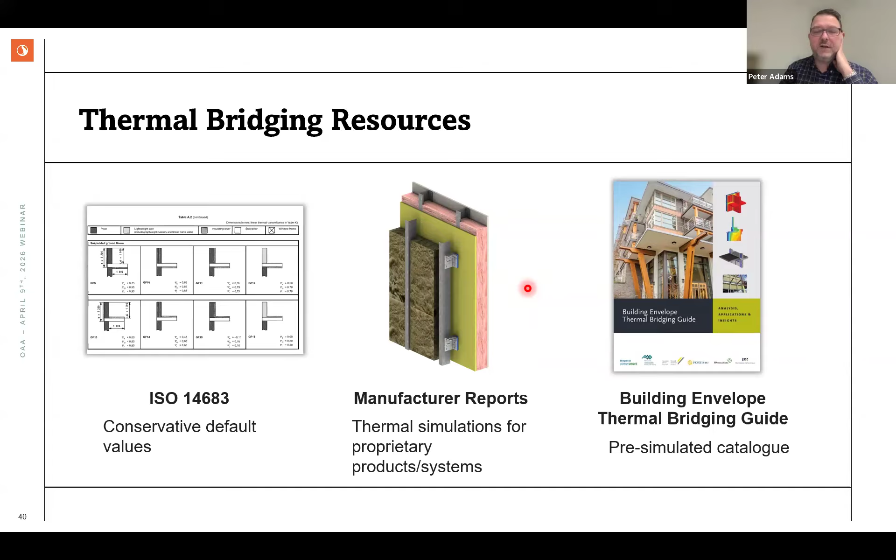So the old version of the guide, and we'll get into the new version now. The new version's online, and I'll give you a small demonstration in a little bit. But the old version of the guide includes Appendix A and Appendix B.

Appendix A is the assembly on the left-hand side. You'll see all the materials listed here, all the assumptions used for conductivity, density, specific heat - all that important stuff to reproduce the simulation if you wanted to. And of course, the geometry. In this case, we've got an insulated wall assembly, exterior sheathing, insulation.

Appendix B is all the good stuff, all the stuff that comes out of the simulation work that shows the performance for that wall system.

The first thing you notice is the titles are pretty long, and they have to be because there are slight differences between a lot of these details. This particular one: exterior and interior insulated 3 5/8 by 1 5/8 steel stud, 16-inch on center, wall assembly with horizontal Z girts, 24 inches on center, supporting metal cladding, clear wall.

There might be different spacing, there might be another assembly that's different spacing, so there's a lot of similarities. You have to be very careful of what you're picking so that it actually matches the detail that you're interested in.

The thermal performance indicators show that for this particular assembly, the baseline condition is R14.2 within the stud cavity. It's a 3 and 5/8 stud, fully filled with insulation, giving you R14.2. So that's your baseline insulation value.

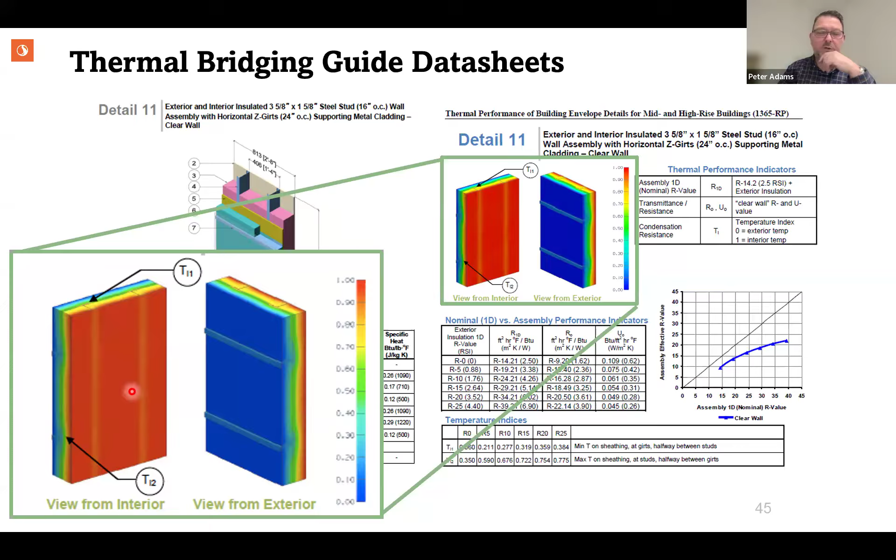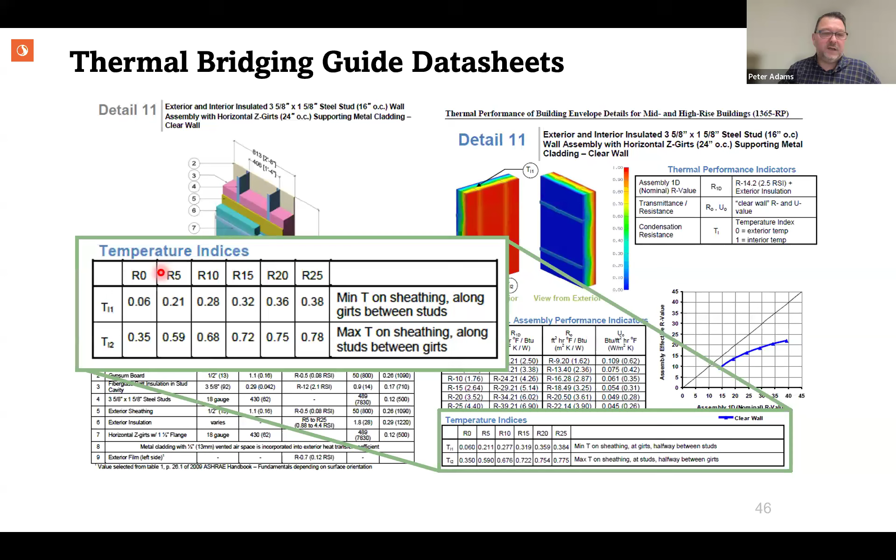The information from this study also includes surface temperature information. For every assembly there are typically 1, 2, 3, or 4 points where it'll calculate the temperature index - sensitive points within the assembly you can use to figure out condensation potential. The graph shows where those temperatures are, and the table gives you those temperature indices, which you can think of as a percent of interior temperature - the lower the value, the worse the performance. For 0 exterior insulation you get R5, R10, R15, etc. outside, and it gives you the changing temperature indices for both points, which you can use to figure out condensation potential.

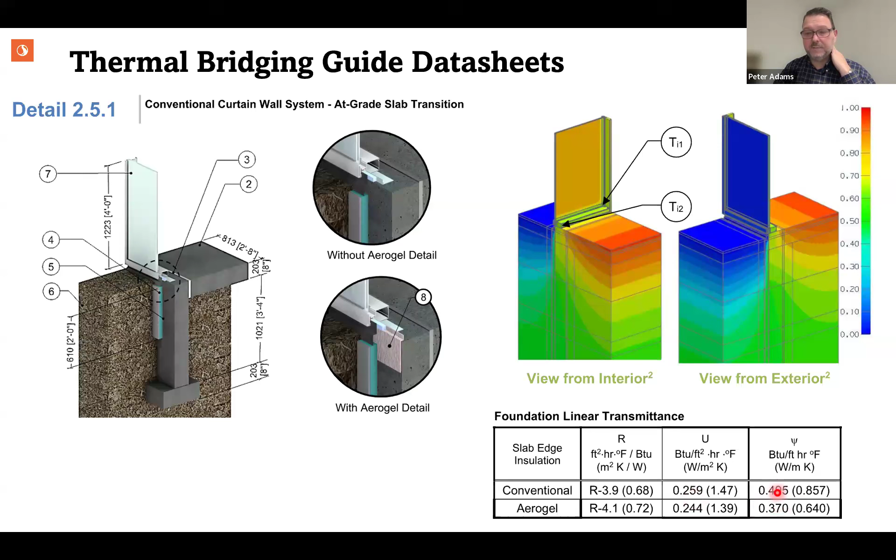There are two different assemblies here - with an aerogel at the slab edge and without. You can see what the isotherms look like. There's a table for linear transmittance included for each of these linear transmittance elements, giving that value for each scenario - conventional without aerogel and with. There's a substantial difference in the heat transfer here, so it helps - the aerogel certainly helps.

The thermal bridging guide was great and was used extensively in industry, offering a lot of information for people. The nice thing is you didn't have to do a lot of the 3D simulation work yourself - it was already done for you. For that reason it was widely used - if you could add and subtract, mostly add, you could figure out a really good picture thermally of how your building is expected to perform. The guide allowed people to compare different details and pick one that made sense for their work and building, focusing on the elements that cause the most grief.

It was a little bit cumbersome to go through Appendix A and Appendix B, so the whole catalog of details has now been put online, and it's freely accessible for everybody.

If you go to thermalenvelope.ca, you can get access to basically the whole contents of the thermal bridging guide, except it's updated regularly, and it's a lot easier to use. You don't have to flip back and forth between PDFs and cut sheets and whatnot.

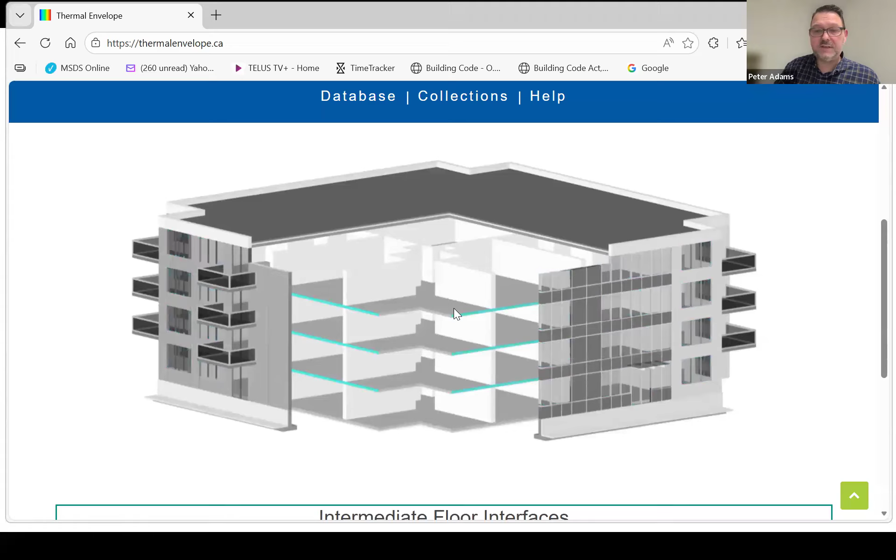Your welcome screen is basically this generic building here, and you can pick whatever you want in terms of what type of cladding system you're interested in. So let's pick clear wall assemblies. You click on that, and it'll open up all the catalog elements for clear wall assemblies. The focus here is you find that clear wall assembly that matches what you're either intending, or you find a clear wall assembly that gives you the performance that you need.

There's some interesting tools here to help you make those decisions. There's lots of keywords, and all kinds of different backup walls and options you can pick here too. The other thing which is kind of neat is this minimum thermal performance slider. So right away you can start picking systems that have whatever performance you need—you won't see things that have a worse performance than whatever your slider shows. That actually helps narrow things down very quickly.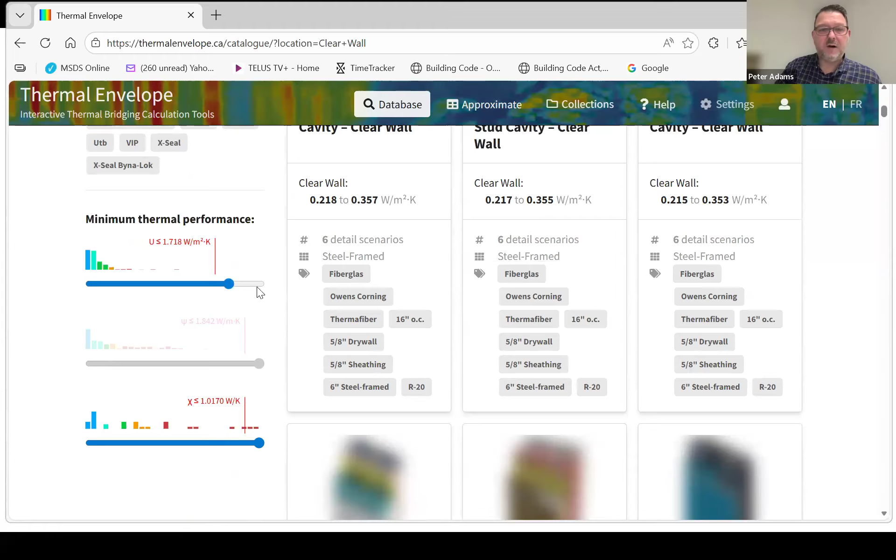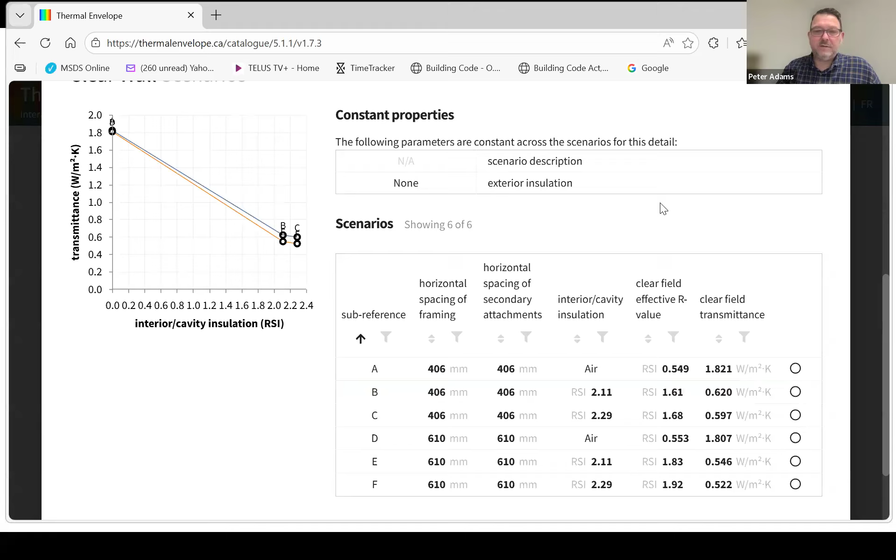If you go into any of these assemblies—we'll just pick this top one here—it'll open up this page. It'll give you a lot of the basic information, all the output from that simulation that was done for this element. It'll also give you the Appendix A and Appendix B cut sheets from the actual thermal bridging guide.

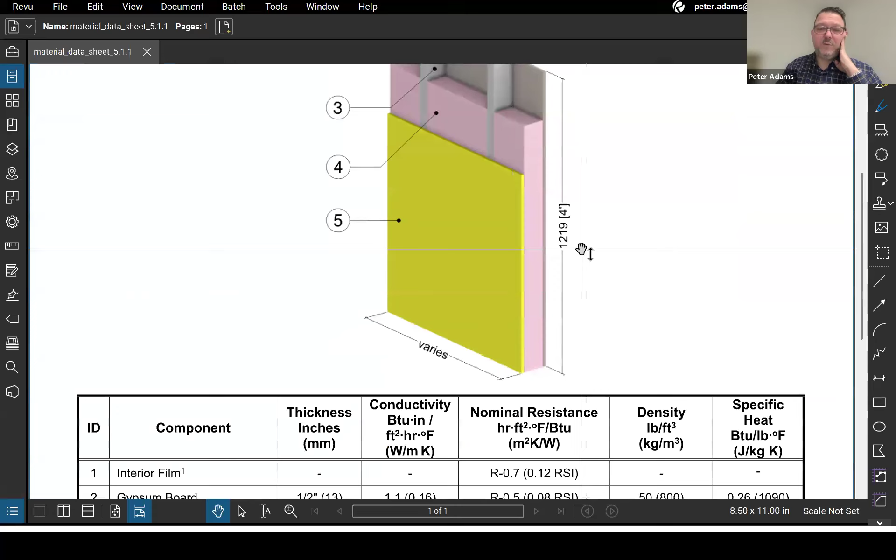If you click on one of those, it opens up fairly quickly. You'll actually get the full page of Appendix A, which includes all the information that you would expect to see and what we just went through. It gives you detail 5.1.1, gives you all the information that's available to you.

If you want to go back, you go back to the catalog here. From here you can start picking different details as well. You can pick a glazing transition.

Okay, hang on. Delay.

So here's your window spandrel, right? You've got all these spandrel details that you can choose from.

It also allows you, if you've got two systems that are similar but your system is slightly in the middle, you can certainly do linear interpolation to figure that out. But with over 800 details now available—you can see here there's 800 details—there's a good chance you're going to find something that's going to be useful for you, whether you're picking from this catalog or you've already got a system in mind and can find something that looks very similar.

The interesting part too is under collections, you can start building a collection of details to build a building basically. There's an archetype building here that has already been assembled as an example, and you can see that this is already including a number of different assemblies. You can start building this, and through this function here, you can start comparing different assemblies as well.

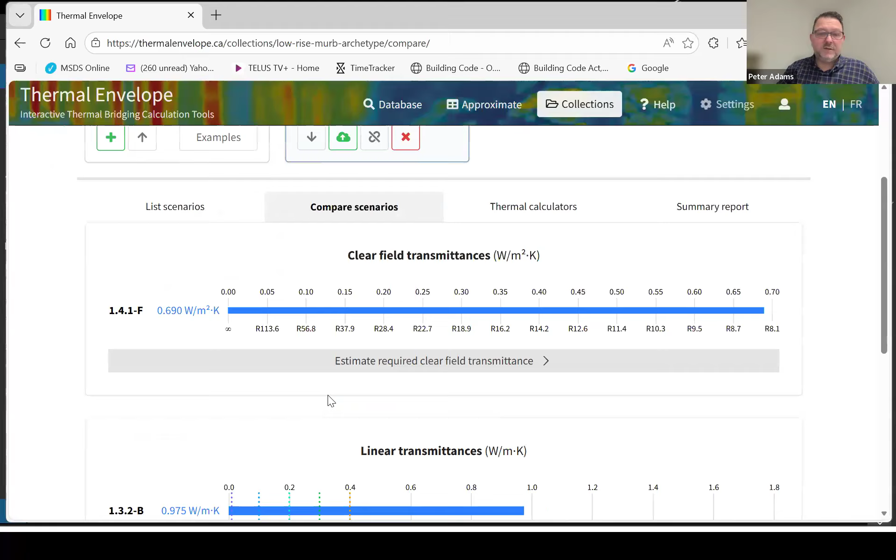So you can click compare. You can select a number of clear field transmittance, for example, compare them all together. You can pick a number of different elements and compare them all together and try to find out which one gets you to your happy place. So it's a very interesting and useful tool.

Great for a Friday night with your family if you're up to entertaining them. But there's lots of information here.

I encourage you to go in and play with it a little bit. Sign up, get yourself a free account. There are some help files available, and some videos that'll help you get through it. It is a really great tool, and it makes it a lot easier to find the assemblies that were normally a bit of a challenge going through with the appendix in PDF formats.

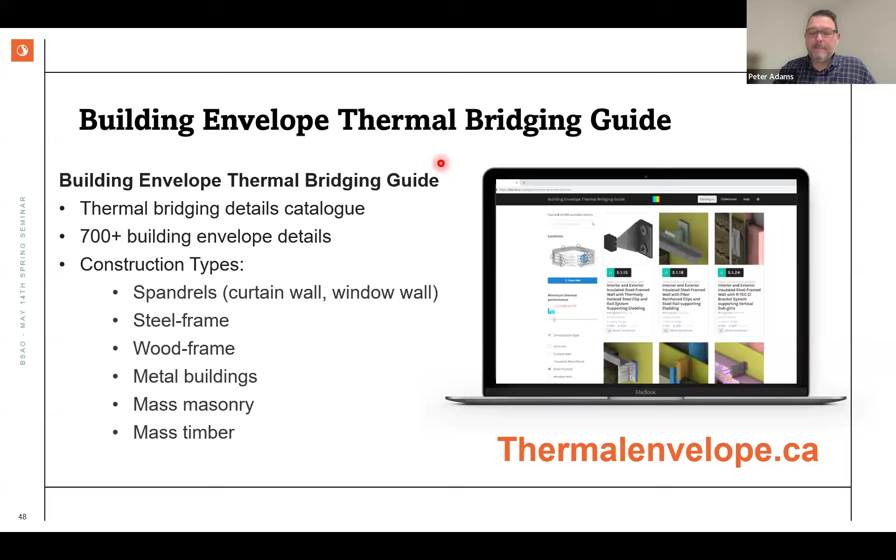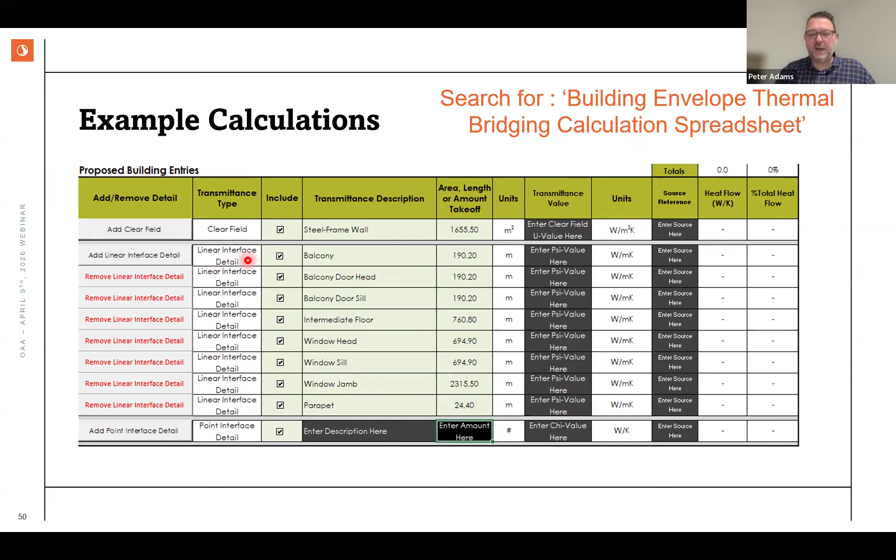There are other tools available as well. There's a spreadsheet online that anybody can make, basically totaling up all the different linear transmittance area lengths, your total wall areas, your number of heat transfer points, thermal bridging. You can do your own spreadsheet, but there's one out there that you can find by searching for a building envelope thermal bridging calculation spreadsheet. I tested this the other day. You can download it, and it sets things up for you already, making it easy to start entering information either from thermalenvelope.ca or from the thermal bridging guide PDFs. It's basically just a simple spreadsheet - if you can add, you can do this work.

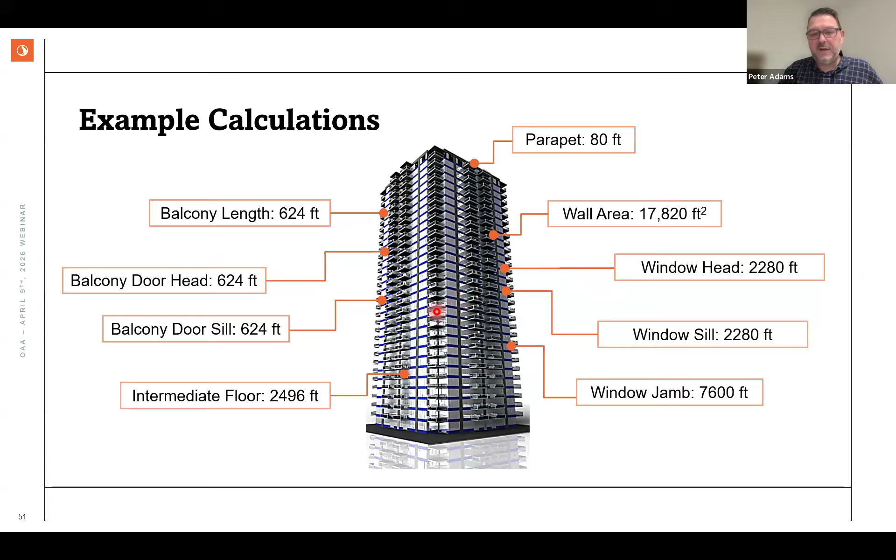Going back to our original MURB example of how you can use this: you go through the drawings and start doing takeoffs from the different areas. So here you've got 624 feet of balcony length, 624 feet of balcony door head, almost 2,500 feet of intermediate floor, 7,600 feet of window jamb, and so on. You start going through your drawings, and since this particular building is repeated floor to floor, you can do this fairly quickly - you're not dealing with complex architecture here. Once you do one floor, you can multiply it by the number of floors you have, and you've got a pretty good total of what you've got. Just be careful not to double count things when doing these calculations.

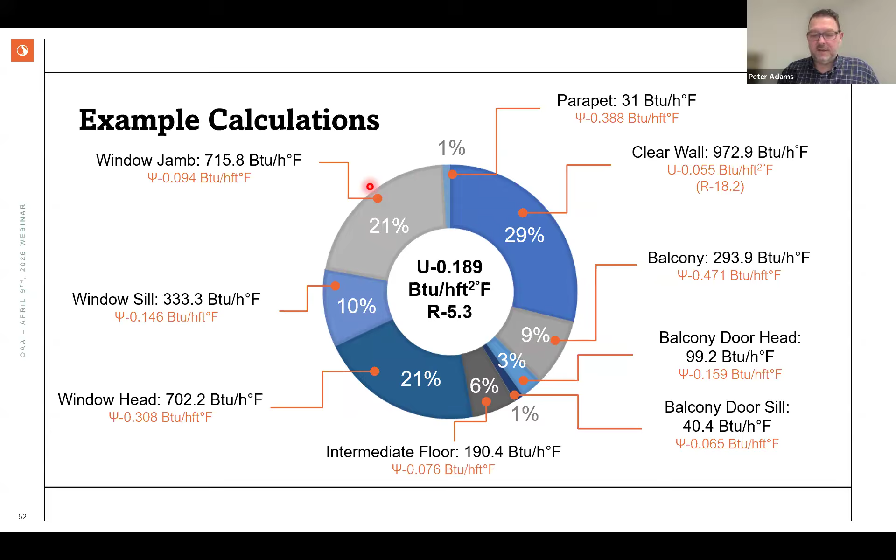When you start looking at where all the heat loss is coming from, the spreadsheet and calculations will start showing you where your biggest problem areas are. The interesting thing here is that clear wall area, assuming an R value of about 18, is only 29% of the heat loss. Before thermal bridging was considered, this part of the pie - this 30% - was all you got for your entire heat loss calculation for the building. So when you did your thermal performance calculations, you were only getting 30% of the energy loss; all this other stuff would have been ignored. No wonder our prediction equations and modeling for the whole building weren't accurate - these are definitely thermal bridges too far. We're ignoring way too much of reality to get anywhere close to the real performance numbers.

Here's an example of picking better details, which we've touched on before. With typical windows where insulation is a little misaligned, and a continuous balcony, using 2-inch wall insulation gets you R 5.3, and 4-inch wall insulation gets you R 5.8. But if you go to a mitigated detail where you align your wall insulation with your windows and use thermally broken balconies, you can quickly get a substantial increase in performance. Going to a more enhanced balcony situation doesn't give nearly as much of a jump. But mitigated details can make a big improvement with really small changes to the envelope design. What's interesting is that 2 inches of insulation with a mitigated detail is much better than a wall with 4 inches of insulation using an old style detail. So less material and small changes to the detail can get you a much bigger thermal performance increase than just adding insulation to an old school detail - lots of smart choices to be made for sure.

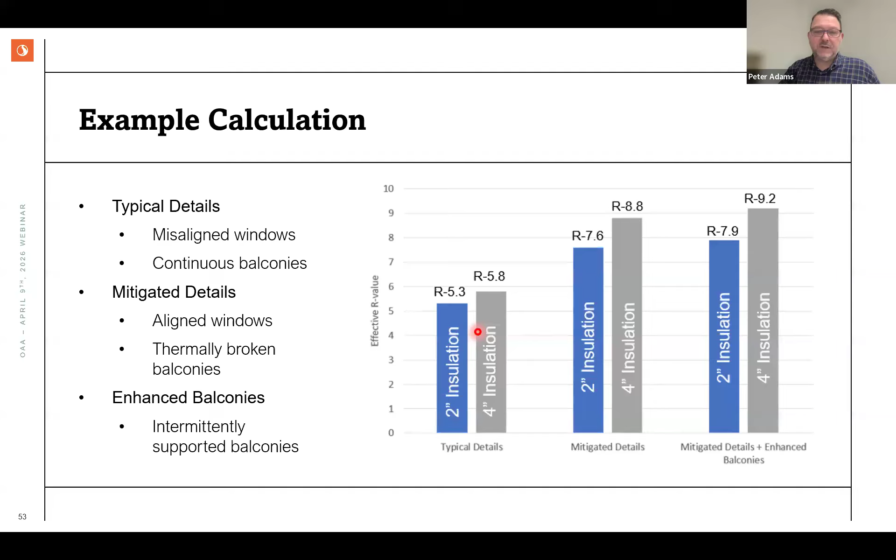So in summary, thermal bridging—I think a lot of these things are obvious. Increased heat loss, condensation risk, it comes in many forms, which we talked about. An overarching concept for me is just don't do silly things. I see a lot of silly things being done, either in the field or in design. Try to avoid silly things.

Thermal bridging mitigation—there's lots of strategies that we talked about. The building codes are getting there. They're not quite there yet, but a lot of the standards that are referenced now have some thermal bridging requirements in them, so stay tuned. It's a good idea to get prepared for that now with your designs. Start thinking about this so that you're ready when the codes actually do require a lot more attention to thermal bridging.

And of course, look at your resources—the thermal bridging guide, and of course, thermalenvelope.ca.

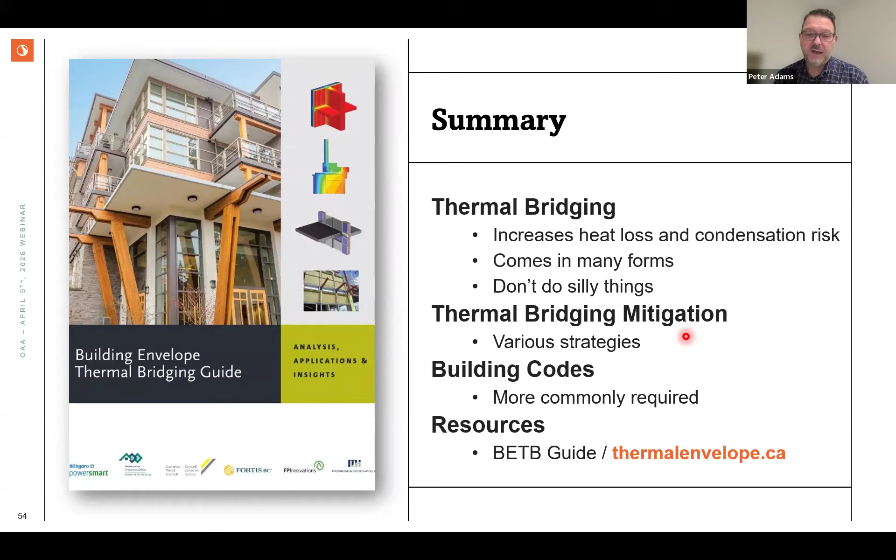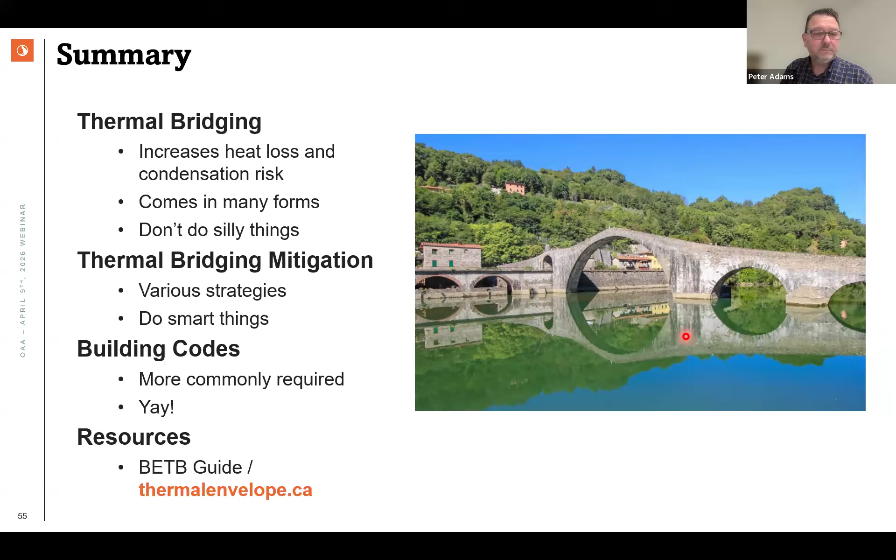This is the bridge here. It's near Lucca, Italy, which is a fascinating bridge to walk over. Sorry, this is a repeat slide from the one before, my apologies. I like to leave my presentations with kind of anecdotes from the past.

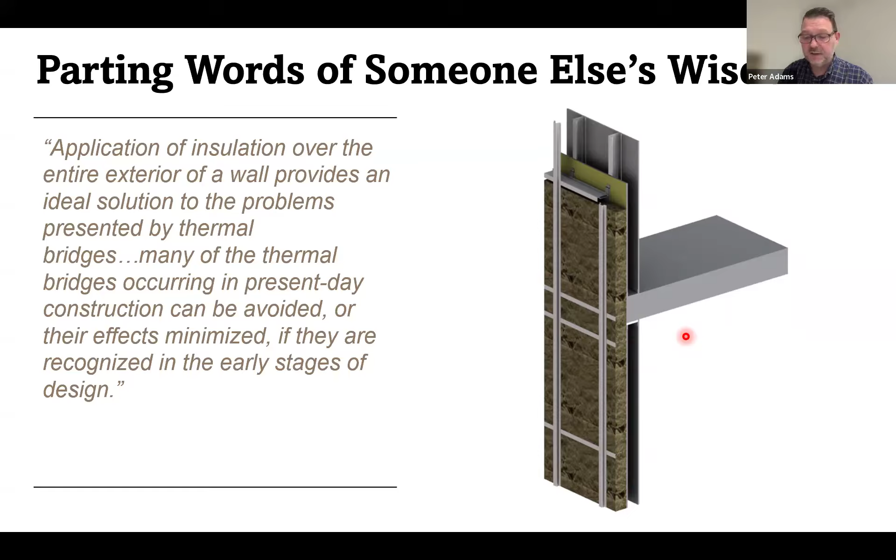So, parting words of someone else's wisdom: application of insulation over the entire exterior of a wall provides an ideal solution to the problems presented by thermal bridges. Many of the thermal bridges occurring in present-day construction can be avoided, or their effects minimized, if they are recognized in the early stages of design. It sounds pretty prescient and modern, right? Well, that came from the National Research Council in 1963.

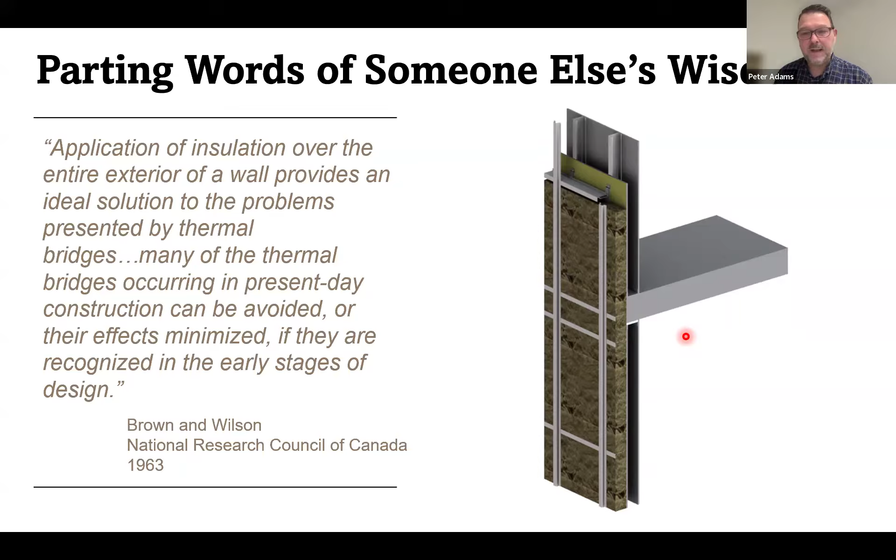One of my colleagues used to say we're in great danger of... sorry, I can't remember my anecdote. Once again, sorry, my apologies. Once again, the ancients have stolen all our good ideas, is what he used to say. So a lot of the stuff that we've figured out a long time ago, people think it's new and great today when maybe it's not—maybe it's a concept that's been around for a long time.

And thanks very much for your attention. Certainly welcome any questions or comments, shared stories.